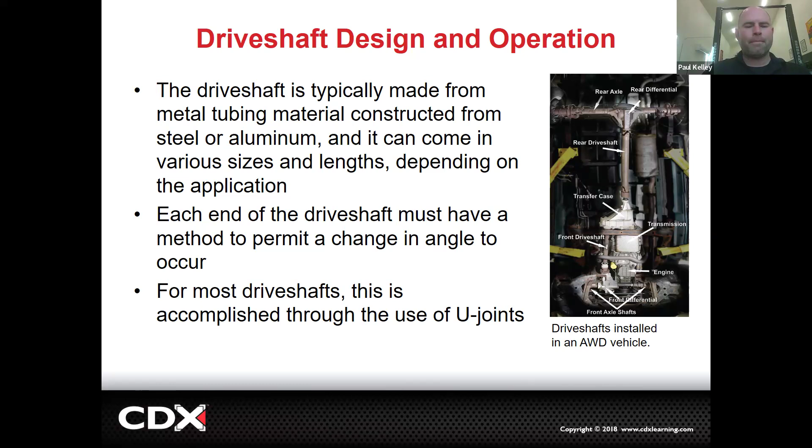Continuing: if you look at the drive shaft, keep in mind, as that rear axle goes up and down, that's going to lessen the distance from the rear axle center line to the back of the transmission. So this drive shaft has to go up and down, which means it has to get shorter and longer, and it has to be able to flex. So we've got a U joint here and a U joint here.

As we get into some of this discussion, the angles are very critical here—mostly it's actually the angle of the pinion and the angle of the transmission. So when you start doing vehicle modifications, that's when you may run into problems. If you modify it, you really need to know what your new angles are, and there are specifications on that, but you generally won't find them in the service manual. Let's say this is a Tacoma—the service manual doesn't write specifications for people to mod the vehicle. They write the specifications for people to repair the stock factory OEM vehicle.

Makes sense? They're not really trying to support the aftermarket, but some of the aftermarket companies will put out some pretty good information. So a lot of what we're about to talk about is more applicable to people doing lifts, lowering, modifications, and building custom drivetrains. With that being said, because we're really trying to prep for the ASE, we're going to cover it to what you need to know for the ASE, but probably more too. I think if you understand more it'll make it even easier to really understand those ASE questions related to drive shaft issues, particularly vibrations. Vibrations can have a lot to do with the drive shaft.

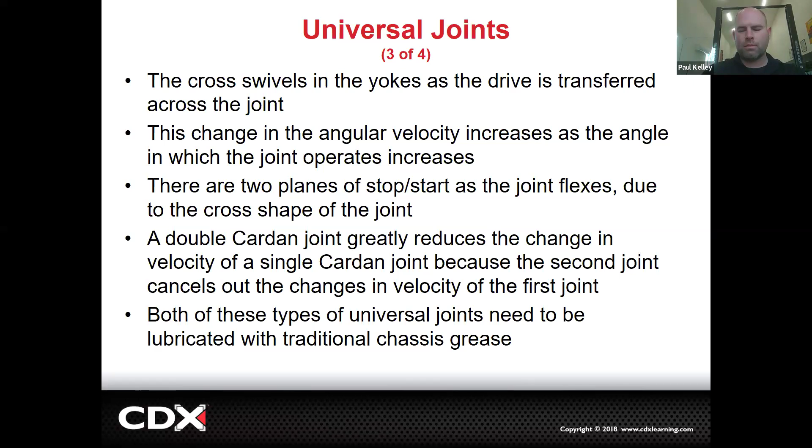So if you did the correct assignment, you would have watched a video, so you should be semi-familiar on this. A lot of this is hard to explain with words. Pictures help, animations are infinitely better. I don't have the ability to make animations, at least not yet. Maybe someday. All right, so here's going to be your drive shaft.

And then once it crosses past 90, it's going to actually start to slow down at 135. And then it's going to reach its slowest speed at 180. So that would be like a half a rotation, right? And then when it reaches 180, it's again going to start to speed up.

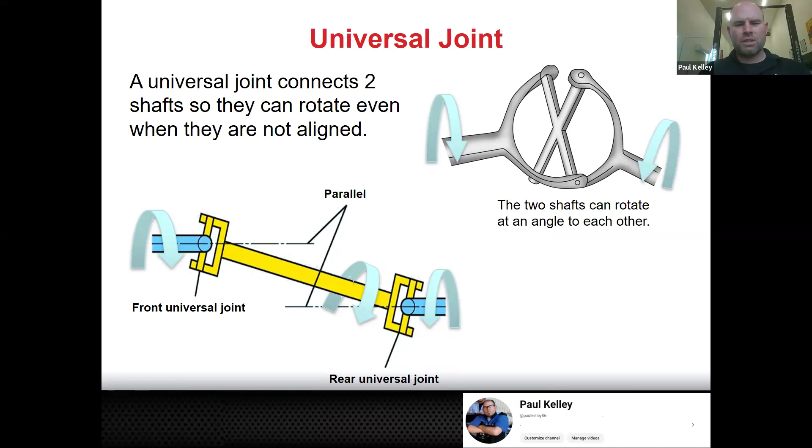It's like pressing a bearing. You don't press an old bearing out and then press the same new bearing back in. If you're changing a slip yoke, you're changing that, at least that U joint. And if you want to change universal joints, you can.

One's a Chris Fix video. Chris Fix does amazing videos. It might not be the most technical, but you can see well, you can hear well. He spends a lot of time editing. He'll show you a way to do the U joint in the driveway.

If you were at the dealership and you wanted to change a slip yoke, you probably wouldn't do the U joint. You'd probably send the drive shaft out, and a drive shaft shop would do the universal joint in a press. They're going to do it a little bit different - put a new yoke on, and then actually balance the drive shaft. So it's kind of a better service, but it's a lot more money.

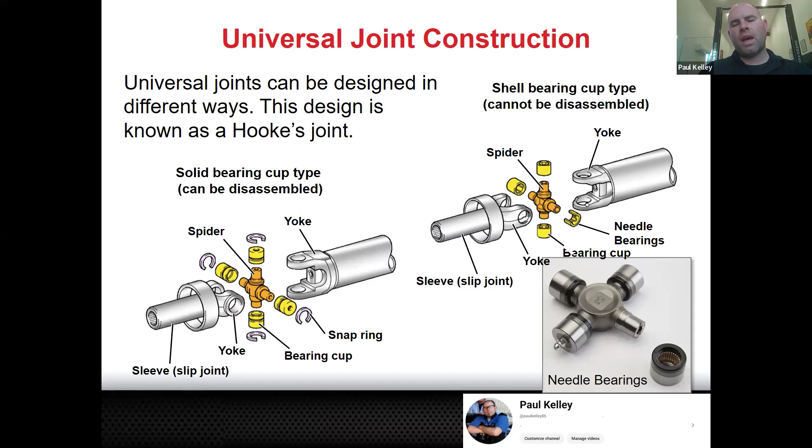So it would be nice if you could pump grease into there. There's a tube, so if you pump grease right here, it goes through a passageway and pumps up this cap, and this cap, and this cap. If you did that every oil change or every other one, you could really make that U joint last. So this is a nicer design, but from the factory, they're not going to give it to you - you can't have that.

Especially if it's a two-piece drive shaft with 3 joints and a carrier bearing, this one could be out of phase, that one could be out of phase, that one could be out of phase. So what do we do to prevent that if we disassemble it? Well, we can match mark it - we'll match mark it here, here, and here.

Okay, why do we want to do that? I can explain it, but I can also give a specific example. I knew some guys who worked for some municipal company - you know, like a city or town water department or power company that provided services. They had a fleet of trucks with their own fleet mechanics. I recall they were in a hiring session talking about who they want to hire and why, and a guy was kind of razzing him, saying, hey, at the fleet shop we're paying 30 something dollars an hour. Then one of the instructors, who was from science, engineering, and math, said, well, what you're paying is equivalent to what my engineering students start out at. He said okay, then asked, but what are your requirements? It doesn't sound like you really have any minimum requirements for the job.

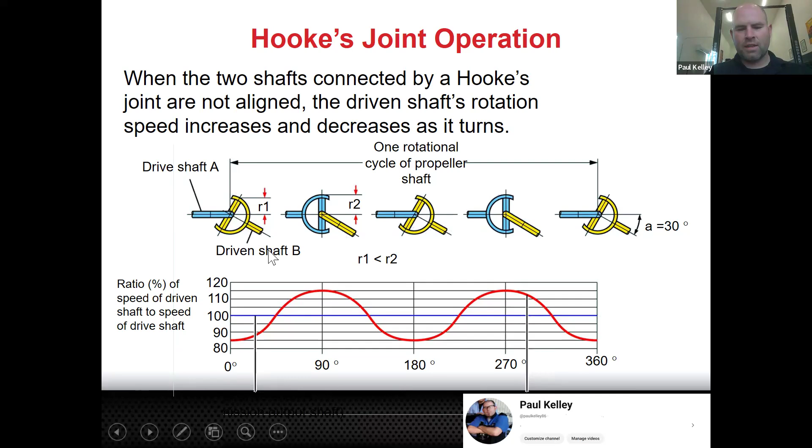They cancel each other out. They should constantly be canceling each other out. It's pretty crazy, huh?

So that's pretty much Hooke's joint theory. If you saw the video, they have a really cool trainer. You can actually hear the speed because they hold a card up against a reluctor wheel and change the angle and goof around with it.

But remember, the key is this input of the drive shaft, which is the output of the transmission, needs to be at the same angle as this, which is the output of the drive shaft but the input to the rear differential. So this angle right here is actually the differential pinion. This shaft right here is the differential pinion, and this shaft right here is the transmission output shaft.

So in a way, really what we're worried about is that transmission sitting on the cross member correctly, and is that rear axle sitting in the leaf springs or whatever correctly? They need to be level. The drive shaft can have an angle, it can't have an extremely steep angle, but it can be 30 degrees as long as the blue lines are parallel.

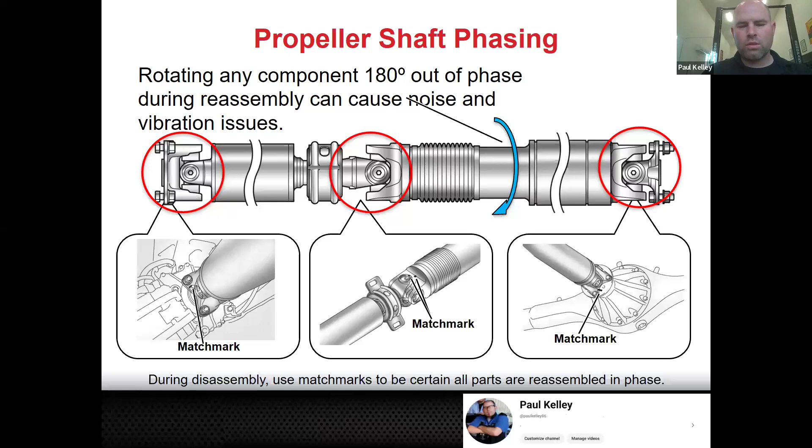The more U-joints you have splitting it, the less accentuated it's going to be. So keeping that in mind, we might not have room for all that on a Jeep because it's a tiny, stubby little drive shaft, but we could do what this right here is: a double cardan joint.

So the input is going to this yoke. The output is going to this yoke, which becomes the input for this yoke, right? So there's basically a two-piece drive shaft with three joints in the length of a single piece. If you see something like this, you're like, what the heck is that? That's just because it probably had a pretty steep drive shaft angle and they wanted to minimize the Hooke's joint effect, but they didn't have the room.

So this is a nice design. We do the same thing, you could measure all the angles. And then a really nice design, probably better, is this. Do you notice that it doesn't have a U-joint here? What does it have? Constant velocity joint. So this is like half of a CV axle.

In this joint right here, it's CV, constant velocity. What is that coming at the end? Just remember, they can put a CV joint in a drive shaft. Subaru is notorious for that, Subaru loves putting CV joints in. They'll have a CV joint with a big corrugated boot, looks just like a CV axle, in their drive shaft, and they'll do it front and rear. So it's kind of cool.

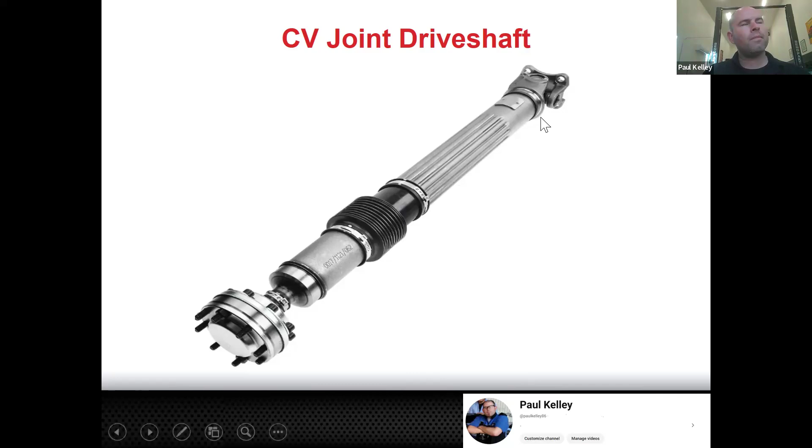All right, now when we're talking about all this, you got the big theory now. You're like, oh, Hooke's joint theory, I totally got that, why do you care? Because if we have an issue and we need to diagnose the drive shaft, you need to understand these concepts.

What can go wrong? We could have a noise, a bearing noise, a squeak, a squeal. Remember that rear U-joint in the snowy, slushy, salty Northeast? If that thing is getting salty slush on it, that's going to dry out the grease and lubrication.

Think of what happens with a ball joint, right? In the original state, the ball joint's well lubricated, like a nice fresh shoulder, well lubricated, nice and quiet, no friction, beautiful thing. But then what happens? The boot gets ripped and the grease comes out. It's kind of like this: if that U-joint seal leaks and the grease comes out, next thing you know the water, slush, rust and salt get in there. It goes dry. Do you guys remember what happens with a dry ball joint?

It's not loose, it's dry. Squeaks, creaks, right? So you could have a U-joint that'll squeak. The first point of failure is notorious: get in the vehicle, put it in drive. As you accelerate, especially because you put more force on the joint when you accelerate, it goes.

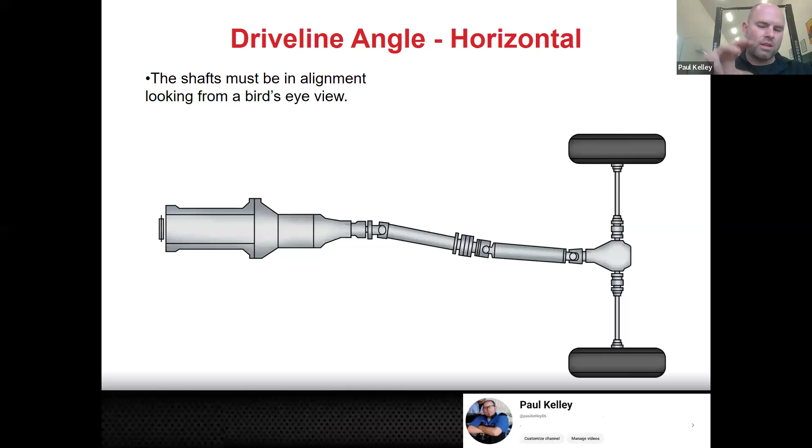So now we've got a few angle relationships to deal with on a two-piece setup. When you add all these up - let's say this one is a positive 15, this one would be a negative 15, a positive 15, and a negative 15 - when you do the math for all of them, they need to be pretty darn close to zero, within a half a degree maximum.

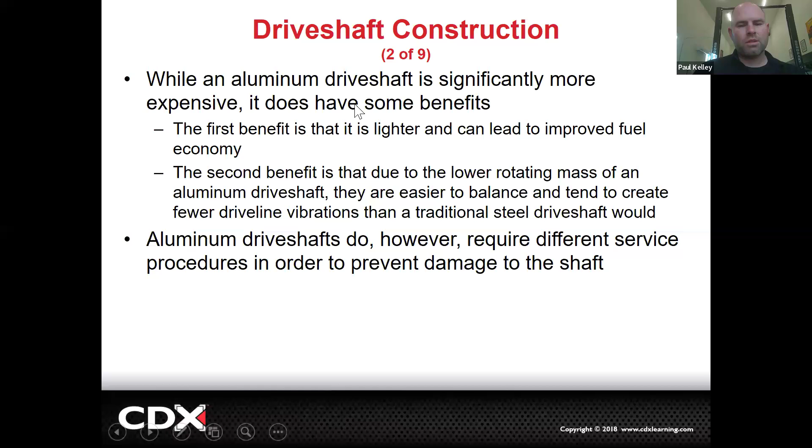But the way we work on them is a little different. Steel was a lot more forgiving, you could bang on these. So when we do U-joints out in the farm, you'd be using a socket and hammering on the drive shaft. Seen it done a million times. On an aluminum one, no, don't do it like that. If it's aluminum, you can easily bend the drive shaft. That's when we get into showing you the proper procedures using a press and stuff. But that's not to say you don't know someone who's done it with a hammer, especially on a steel one. I know it's been done. I've done it, but it doesn't really make it right.

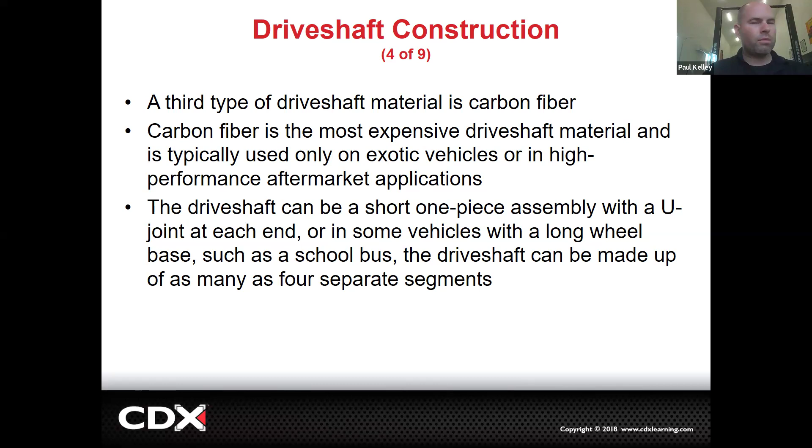What do you think the fix is for that hypothetical situation? Gotta get a longer drive shaft, a custom drive shaft made. They take your drive shaft and add to it in the tube, I don't exactly know how they do it, a drive shaft shop, not someone in the farm with a hammer. A drive shaft shop could actually extend it and then also balance it and do all the details that they do.

Now, if it's four-wheel drive, it's different. We use these companion flanges. If you notice, the companion flange bolts right up to the back of the transfer case, and similar to the two-wheel drive, it bolts right up to the rear axle.

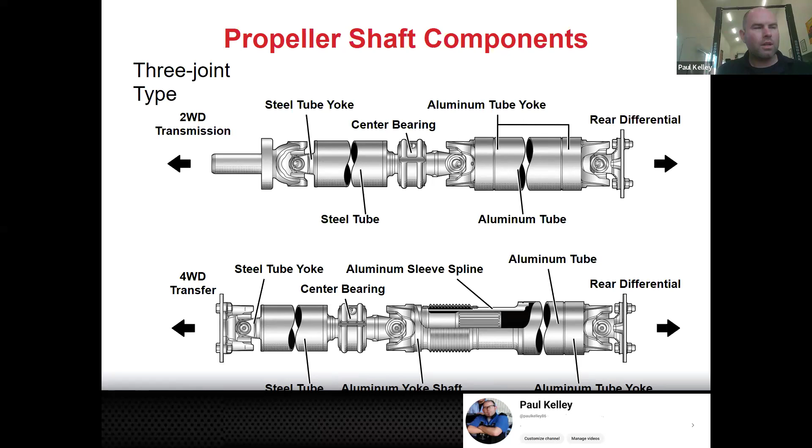U-joints, squeaky noise or a vibration, depending on if it's just dry or if it's full on loose, right? So noises and vibrations are different, but they kind of go a little bit together.

This is definitely when you'd see a grease fitting on a Tacoma. They still do have them on the front drive shafts a lot. All right, and then there's that center support bearing. And then this actually is more just getting you ready to understand.

If you're going to take apart this U-joint, make sure you match mark it. Make sure you match mark it. And then this yoke is welded to the actual slip yoke that's going to go in, right? So be ready to do that work.

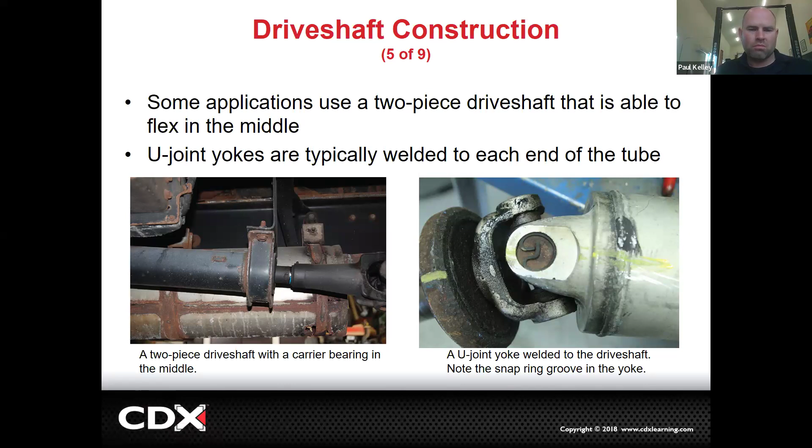Here's your slip yoke right there. You may call it the dangle arm. I totally made that up. If you call it the dangle arm, that's just weird. I'm the only one who called it the dangle arm, and it was only today.

So whatever you say, but this is where the sliding occurs. See how this is all clean metal? That's good. If we got a problem there, which you'll see later, that's when it can tear the seal, right?

So when we talk about the slip yoke, you got to be able to visualize this. This has to seal against that transmission output shaft. If it's pitted, if it's excessively rusty, if that bushing is loose, like we talked about, the bushing has to support this slip yoke, but it also has to be able to plunge. So quite a bit of things going on there.

And then the splines should be lubricated to not have the bowling ball effect. This one is pitted. That transmission output shaft seal is not going to seal against that yoke. So what's the fix here? You guys tell me. How do we get this to be more like this?

You could try to clean it. You could try to polish it. You could try to clean it up a bit with emery cloth. But the thing is, if it's pitted, the pits are low points. So if you go to sand it and polish it up and cookie disc it and all this stuff, it can clean the rust, yes. But if these pits are actual low points, you have no real way to fill those.

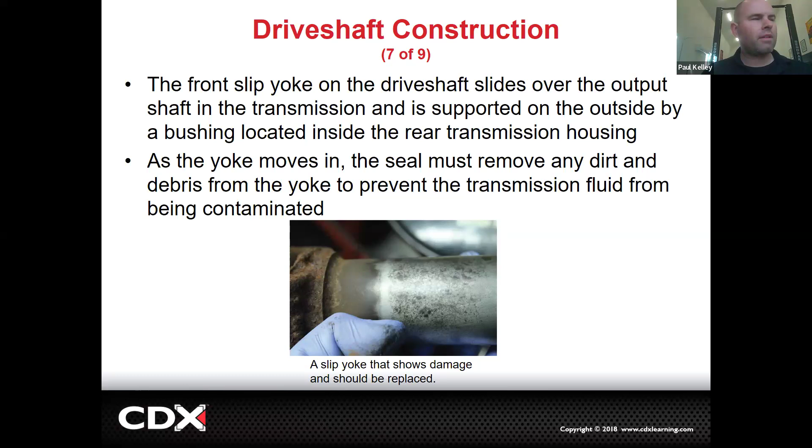All right, there's a good example of that grease fitting where we have the telescoping type drive shaft. That's the slip yoke built in the drive shaft. This is a front drive shaft. Cool. Now this has a different style.

Do you notice this U-joint's exposed? On domestics, they don't have the companion flanges. They basically have the U-joint pressed into this yoke, but on this end, this cap of the U-joint goes directly into the pinion. The pinion has a little yoke on it. And then we put there's a strap and two bolts on those.

So in the domestic world, we use a strap and two bolts right here. They don't give you the full flange, more like what we were showing before. Not a real big deal, but go ahead, shoot that grease fitting with chassis grease on oil changes. That's what you're supposed to do.

Here's an example of that flange. Kind of a cool thing is you can see the outline. So when you go to put it on, don't flip it 180 because it's going to sit weird on the rust. Put it right back where it is so it sits clean. But I'll do it right now. There's going to be a bit of review right here.

Technically, the drive shaft is balanced as an assembly. So if you have a balanced drive shaft and a balanced rear axle, it doesn't really matter if you put this 180, right? In this case, it does because it's rusty and you don't want it sitting on that flaky rust and having it run out, basically like a rotor. But if it's a pretty new vehicle and there's no rust, you can take the drive shaft out and put it back in a different position and realistically won't have a problem.

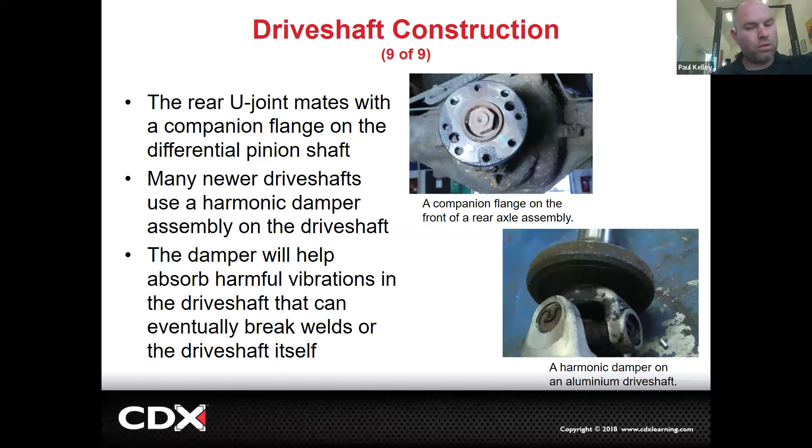But remember, if we're going to disassemble this U-joint, you absolutely would need to match this yoke to this yoke if you're going to disassemble the U-joint. I should be crystal clear right there. Everybody's good? If not, I'm going to move on, but you need to stop me and we'll come back.

Now, when we're doing an inspection, we're looking at this output shaft seal. We're looking for leaks right here. That's part of our inspection. And also, by the way, look at how rusty that yoke is. If that yoke were to plunge very far and this rust were to get sent into that rubber seal, do you think the seal will survive?

So as long as the sealing surface is okay and we don't think it's going to plunge in really far, it could be all right. Rust down here could be normal, but if the rust is closer to the seal and it looks like it's getting into the seal, that's when you need to change that yoke. If it's a slip yoke on a vehicle that's commonly in use, the rust out here just means that area never actually goes in and gets bathed with oil - that's the whole reason it rusted. But if it's a vehicle that sat, you could have rust all over the place. That will ruin your seal - you can put 3-4 seals in there.

Sound familiar? Sound like our A2 review? A technician found a leaking output shaft seal, put a new one in, and then found it leaking again, so they did another one. What should they do, a third one? No - look at the drive shaft slip yoke. Is it rusty where it's touching the rubber of the seal? Well, then that'll do it.

Okay, that should get it. And right here, we're grabbing the drive shaft, going up and down. That's mostly checking this extension housing bushing right there - good concept for you. That bushing should guide the slip yoke and hold it where it's supposed to be pretty well. When we move it up and down, if there's excessive movement, we may actually need a bushing replacement - that slip yoke bushing, that output shaft bushing, may be no good. So that could happen.

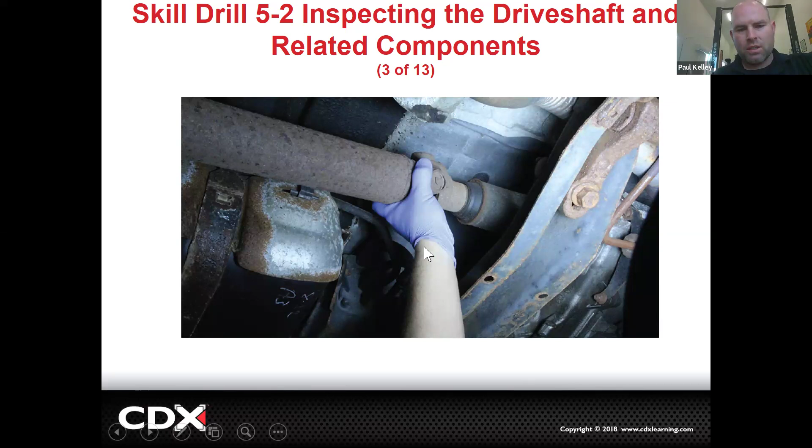That's what we're inspecting. And then here we're looking at a pinion seal leak. This stuff is rusty, but this is the rear axle right here, so this is leaking at the rear pinion. So this is all inspection.

Additionally, if you look right here, we're trying to move right now - what we're trying to do is grab the pinion and grab the drive shaft and try to move the drive shaft. If the universal joints are loose, a lot of times you'll have movement right there, like up and down movement. Like here, we're grabbing it right here, hold it and move it up - that would be kind of like end play movement in the U-joints.

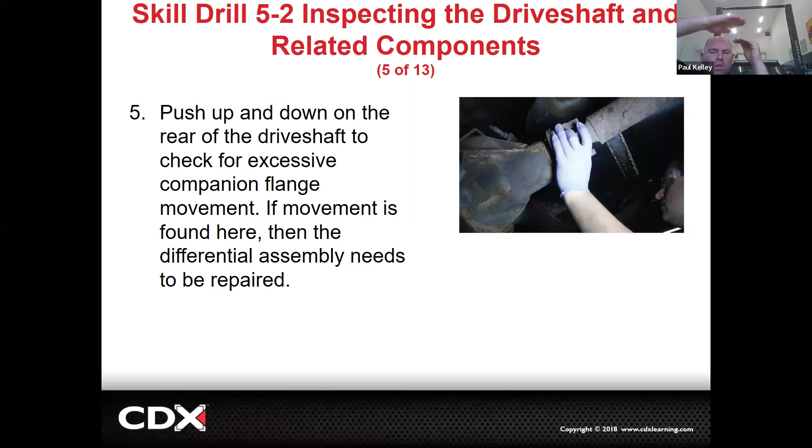That does happen. Cool, we're here, we're looking at the grease seals. Remember I was saying the seals can start to leak grease, and this is where the water and salt water and junk would get in there and really dry that out. That would also be a beach problem. So we got one of the dealers who works on the Huntington Beach lifeguard Tacomas, and they're having issues like this periodically.

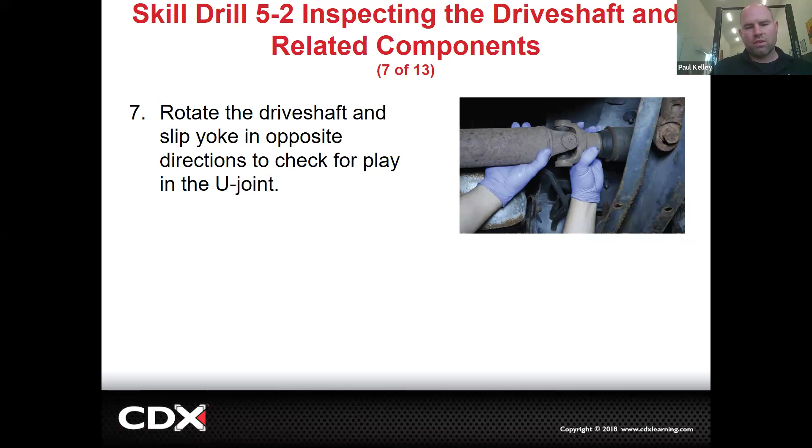Right now, if you were to grab the yoke and the drive shaft and turn them like this, that's checking for U-joint looseness like this. So we got to check like this, but also like this - the U-joints can be loose in different ways. So right here, we're checking for U-joint looseness. If it's loose, it needs to be replaced, and if it's loose, it's going to be inducing a vibration too. Okay, so that's how you would do that one.

Not a real tough thing. And then we're going to inspect the center support bearing. So we would grab the drive shaft, move it up and down right here, move it side to side. While we're doing that, look at the rubber, because sometimes that rubber can be damaged - it's actually pretty common. If the rubber's damaged, the drive shaft sags down and then it's going to get a vibration. Then on acceleration, it might move way up and get a different vibration. If that rubber's bad, you're going to get a driveline vibration, not like a tire balance vibration - it's going to be kind of dependent on your throttle.

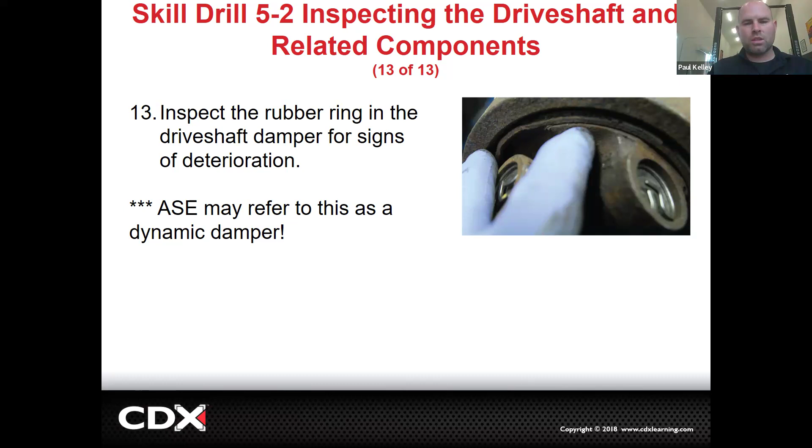All right, and then right here, this drive shaft has a damper, and we're looking at this rubber to see if it's shot, if that damper's moving. Remember, I gave you a clue - there may be something related to like a dynamic damper. This is a dynamic damper - it's kind of like a harmonic balancer, but a lot of times it's on the actual drive shaft. If this damper's missing or this rubber's really damaged, you can even get where the rubber breaks loose and the damper will actually slide on the rubber. That would cause potentially a vibration. So that's all parts of the drive shaft inspection.

Now, another type that kind of goes with the drive shaft, but it's slightly different and not likely to be on the ASE, is called a torque tube. So we have an engine right here, and we don't necessarily have a transmission on this system.

We have the engine going to basically a little transfer box, and then that goes back to the actual transmission. It's a very interesting setup. Actually, I got that backwards.

The engine is in the front and it's got basically a bell housing, and this torque tube bolts up and goes to the transmission, which is back here. So it's like a drive shaft, but all it does is connect the engine to the transmission. It's kind of weird, they call it a torque tube.

That shaft is not exposed. The shaft is inside of a tube, inside of a tunnel. So they call it a torque tube, not really a drive shaft, but it's still kind of like a drive shaft, just to get you familiar.

If you have a front engine vehicle, but the transmission or transaxle in this case is in the back, there may be a shaft connecting the two, such as the Corvette. They did that up through the C5, 6, 7, but the current model is the C8 Corvette, which is mid-engine. They just moved the engine to the back, so it no longer needs a torque tube.

Now let's talk about noises. Like I was saying, a squeak, that's probably a dry U-joint. A clunk, that'd be a loose U-joint. Sometimes loose U-joints can cause other stuff when you're going over bumps. They can do some interesting things.

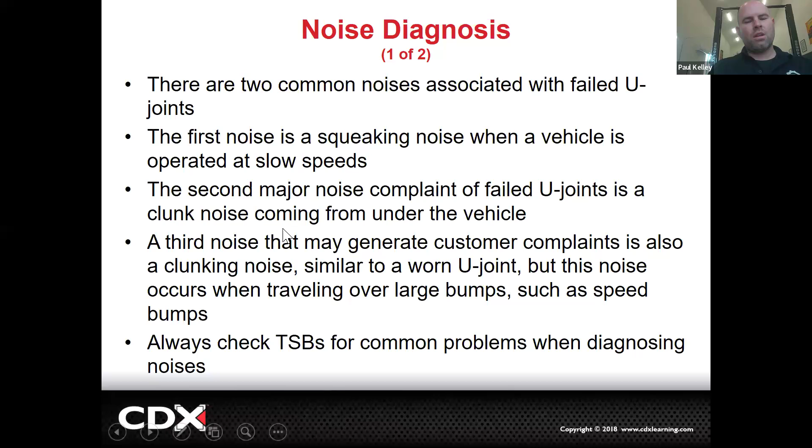Remember, if you have some of these issues, check for TSBs. For example, I told you about that slip stick condition on a GM. This is actually a slightly different one, but it's not greasing it, you're replacing the yoke with a new nickel coated slip yoke. So if you're doing your own diagnosis and think, oh it's this slip yoke, just grease it, but there's a TSB on it with an updated part, you're not being a very good technician if you didn't know that.

So checking TSBs, you can never underestimate how important that is. Extremely, extremely important. Cool. Now diagnosing, ooh, it's going to get a little bit tricky.

I want to mention one tool that we commonly don't necessarily use. It's an NVH tester. We could do diagnosis of vibrations with the Picoscope. You can get a Picoscope with the NVH kit, and it will basically show you different vibrations at different frequencies. You've got to remember on a vehicle, things turn at different speeds, so you've got the crankshaft turning at one speed.

You've got the pistons at a different frequency. You've got the torque converter spinning at engine speed, but the turbine spinning at input shaft speed of the transmission. So those are at different frequencies. You understand what I'm saying? The engine's going 1,000 and the transmission input's only going 800.

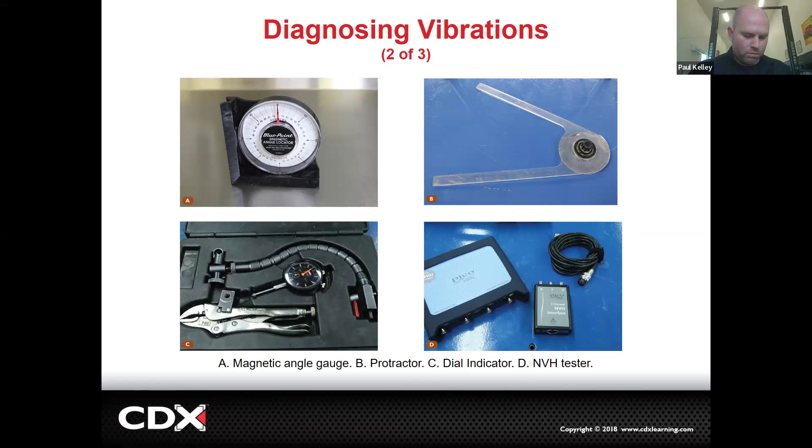A lot of these basics we're covering are a much higher priority. So if I get these more dialed in, I might add a session on NVH, and you guys would be welcome to check that out. But let me see how my priorities are. Because like I just said, I was part of the old school—I saw them diagnose a car as an apprentice, and since then I've needed to do it exactly 0 times.

Now, when we're talking about doing these diagnoses, visual inspection is king—making sure you check for things like the knocked off weight or the brand new U-joints, etc.

We can also measure the run out, I'll show you. Typically 40 thousandths would be the max. A bent or damaged drive shaft would need to be replaced.

So here's how we're going to measure it. Clamp the vice grips there, thread this in, run the snake over to the drive shaft, set the dial indicator on the drive shaft at a nice perpendicular angle, not coming at a weird angle, coming nice and straight, and then spin it, zero it out. And then we're actually going to rotate the drive shaft, and you're going to see how much it moves. Literally like checking run out of a rotor or anything else.

Hopefully there's a spec, but if you'll recall, we talked about a general rule of thumb, no more than 40 thousandths. So it doesn't have to be perfect. It's not like a rotor - a rotor you can't really have more than 2 thousandths, but this should generally not be over 40. You might find that spec in service info. If you find it out there, great.

I love black and white. I don't like gray. I mean, for a car color, I think gray is one of the best. I like black too. I don't like white. I'm sorry, for a house, white; for a car, either black or gray. But in situations, I don't like gray.

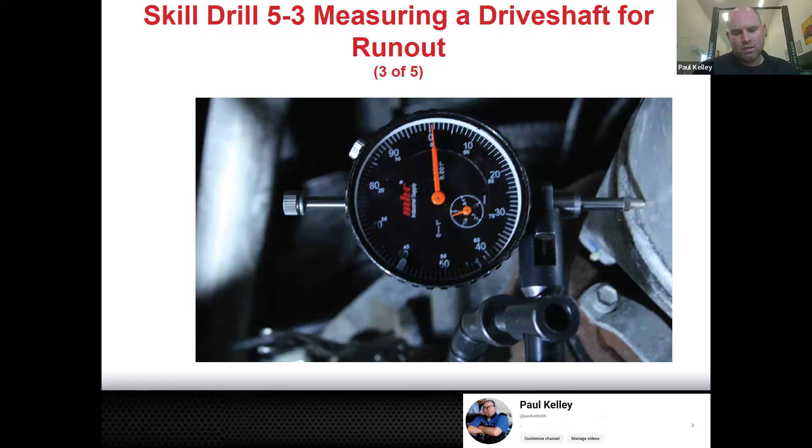So compare it to spec if you can. But again, are you going to do this commonly? Probably not. If you see a damaged drive shaft, you're probably going to see a damaged drive shaft. If it's got a dent in it, and they're not complaining, I don't know that I'd make a real big deal - you might note it. But if they bring it in for a vibration and you can see where they clearly were off-roading and high-sided and it was sitting on the drive shaft and the drive shaft is dented, that needs a drive shaft, right? But if it's something weird and you want to measure the run out, just compare it to the spec. If you can visually see damage though, it's done.

Kind of makes sense. So we'll rotate it, do the measurement. You can do it on both ends, do it in multiple locations - all that's going to help.

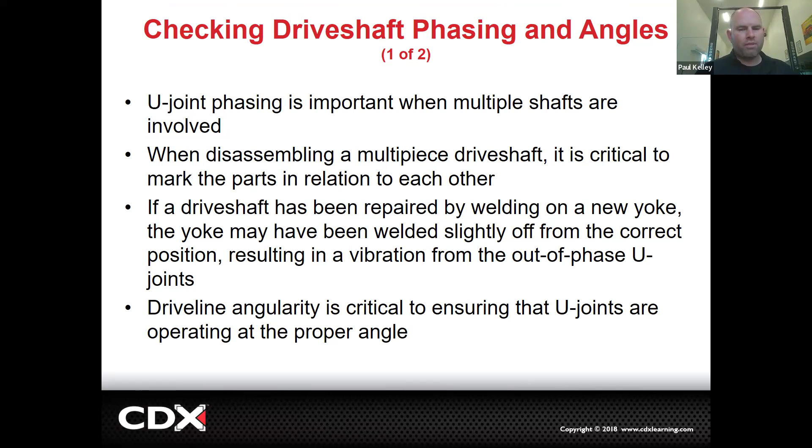Now, when we talked about phasing, disassembling, all that type of stuff, this is going to give you some of the procedures. But first, let's start with what we call driveline angularity - this is the driveline angle measurement. We're going to need two things: one, this is a magnetic square, but it measures angle. We can also use a big protractor, and these together can do the diagnosis.

When are we going to do this? Probably never, to be honest with you. Unless you're doing some major suspension modification, you don't need to measure this. But if a vehicle came in and they did like some crazy SEMA build and they're like, hey, this thing vibrates, first off, it'd be like, well, you did all the fabrication work - setting up the drive shaft should be part of that. But if they're like, we don't know how to do it, we need you to master tech, I'm like, all right, cool, then you need these tools. I don't even own these tools - we have them at the school.

I'd like to do a follow-up video of measuring all these angles, but it would be its own thing. Just understanding them is going to be adequate. For you to get practice and expertise is totally unnecessary because you're just not realistically going to do this unless you become a driveline specialist.

So keep these two tools in mind, and as we go into this, we'll explain it. You want to check angularity - first thing, the vehicle needs to be level at a normal ride height. So good luck fitting under there. You think that you should be able to do this and still walk around at standing adult non-hobbit height.

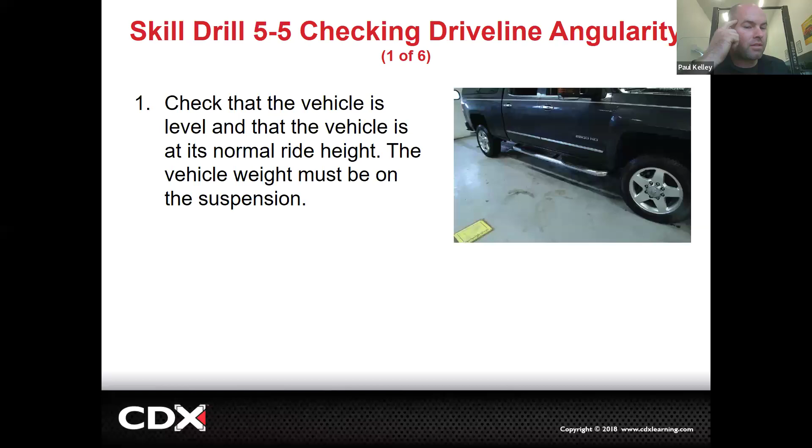There's one lift in the shop you can think of for this. Am I right? You can't have the wheels hanging. It's got to be at normal ride height, it's got to be level. You're going on the alignment rack, right? Do this job on the alignment racks.

Perfect. Now you're going to put an angle gauge on the actual drive shaft. This one's nice because it's smaller. You can literally download that app, and that would work. You need to know that angle.

But the other thing you need to know is the pinion angle. So sometimes if you're lucky, you can put the angle measuring tool on the pinion itself. So the pinion, remember the pinion's that rear diff, that's why we showed that picture. If you know the drive shaft angle and the pinion angle, you can see the difference. So if it's 8.1 degrees and 10 degrees, 10.5, that's 2.4 degrees. That operating angle, that's pretty flat actually, that's a really nice flat drive shaft. So that's got a 2.4 degree angle. That means when you go up to the front, you need to have the equal but opposite angle. Make sense? So that's how we're doing the math, that's how we're doing that measurement.

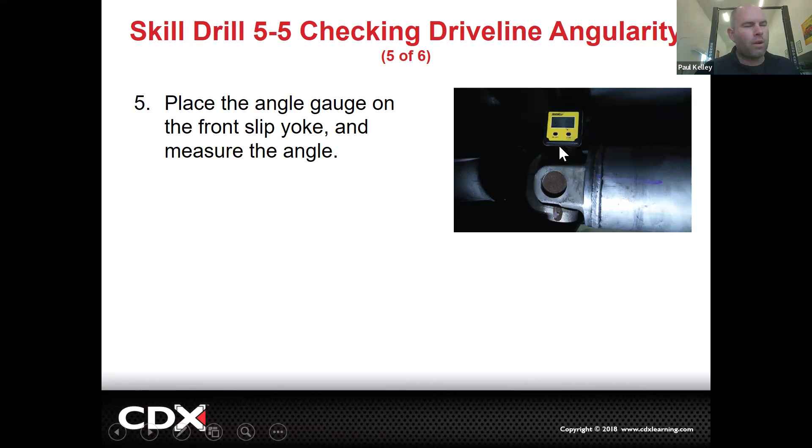Cool, that's a really tough picture to see, I get that. We're going to show it one more way, right? And then if you've got a 10.5 at the yoke of the output shaft and a 1 degree at the drive shaft, you got a 9.5. Those would actually be not equal, by the way. So that could be a problem.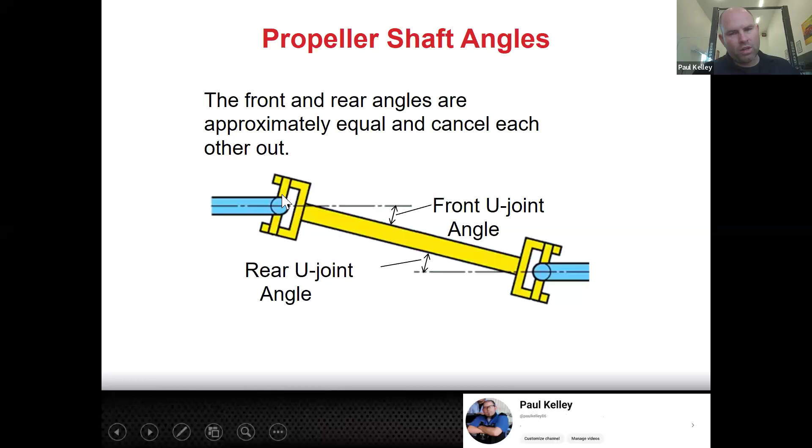Here's what I was trying to say. You've got the output shaft coming out. You see how you'd have a little U-joint cap right there? You'd put your angle measurement tool on that, but then you'd rotate it up to the top at 12 o'clock and you could actually measure it there.

We're going to get a plumb bob and a string and hang it, and of course gravity is going to pull it perfectly perpendicular. And then you can actually measure that angle. But the more practical way, this shaft right here is going to literally control where this cap sits. So if you can just measure right off that U-joint cap, cool.

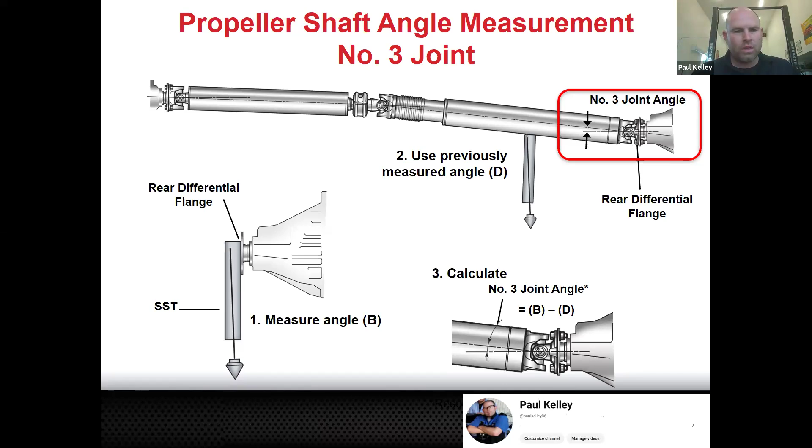So with that being said, that's how you determine the angular operating angles of the U-joints. They may call it drive shaft angularity. And again, as a reminder, if you're going to pull that drive shaft off, a match mark is best practice. But if the drive shaft was balanced independently and the differential is in balance, wherever you put them on, it shouldn't induce a vibration, right?

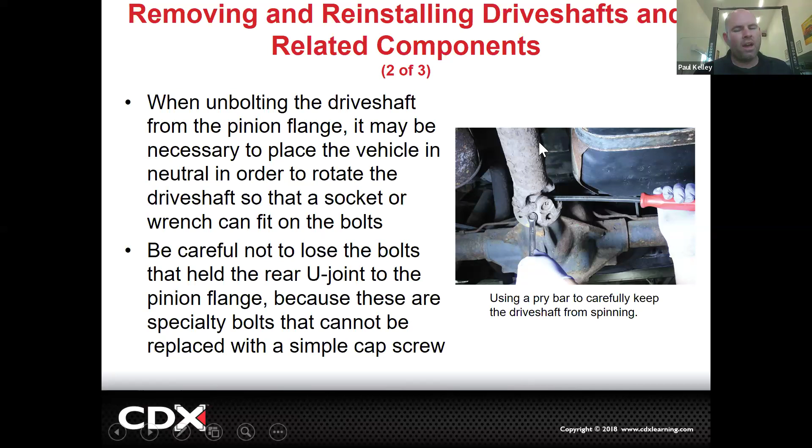Unbolting these companion flanges, prying it out, just be careful with that. If it's going into the open yoke, not the companion flange, it's a good idea to run electrical tape around these caps. Do you know what happens if that cap falls off? Remember those little needle bearings? Those things fall in, they fall out, they fall down the drain. You can mess one of these up.

The good news for you, Toyota people - the companion flange, you don't really have to worry about that. The companion flange is so nice, but the domestics save a little money not doing the companion flange, and they have the U-joint seat right into the pinion yoke, and the caps are held in by nothing once you undo the straps. So tape them.

You can see this is a good image of the strap, right? The strap holds the cap directly. You take these bolts off, you take that strap, and then this cap can fall out. So be careful.

And look at that - what do we got right there? That's another spot you may see a Zerk or a grease fitting. So if we wanted to grease that, you'd have to get the grease gun on there. Sometimes you can, and sometimes you need a special one with a longer needle to pump that grease fitting up. The ones on the end of the cap are a little bit nicer, but then they can also get hit by something. So they do make one that's a very low profile grease fitting, but you need a little needle grease gun to pump those. So you got some options.

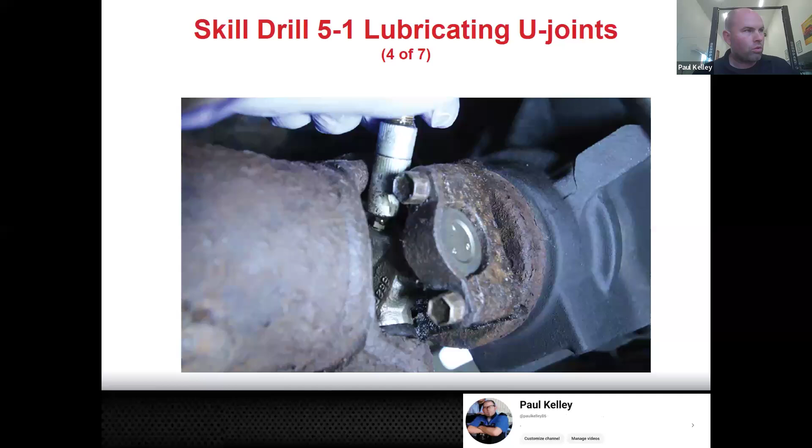See a little bit of grease coming out, that's good. This boot's a little swollen, that's good. That one's perfectly great. You don't blast the thing so grease blobs all over the place - it's just excessive. All right, more parts of service.

We need to balance this drive shaft. When I say we, I don't mean us - I mean someone else. It's not commonly done. Many shops are not going to buy all this specialty equipment. There might be one shop in your area that does drive shaft balancing, and they balance everybody's drive shaft and they get all the business. That makes sense - that way we can keep the cost down. The beauty of the free market, right?

But there are methods of field balancing a drive shaft using hose clamps, but generally we don't really do that. I feel like I'm always in two different worlds. I came up right at the end of old school when we were doing crazy stuff, and then the recession changed a lot of stuff, and business got leaner and meaner, and just the way we did stuff is different. We're no longer super concerned about saving the customer that much money.

We're just like, you know what, this one's getting sent out to the drive shaft shop. Back in the day, we were doing some field balancing, but that was just as I was an apprentice. I never even did it as a line tech.

So if you want to balance a drive shaft, here's what you have to do. You have to have this special machine. You have to put it into this yoke, bolt it down right here, set the angle, turn this thing on, set the test speed. You want to measure it at 1200 RPMs, no problem. You're going to measure, it's going to give you numbers, you're going to look into it. You're going to be like, hey, it needs a weight right here. You're going to make a mark with that weight and hold it there temporarily.

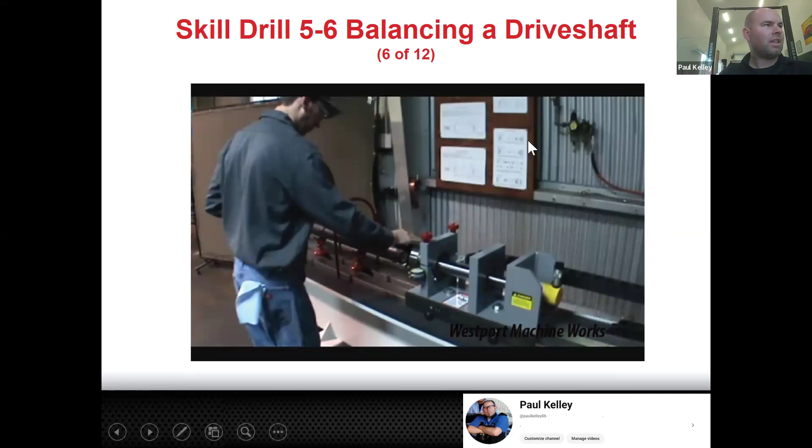Do you think that this is what we're going to be doing? Are we going to do this? This is what a drive shaft shop does. Balancing it is actually not that different than wheel weights, except you have to weld them on and you need the special machine. It's not really rocket science. Just look at this thing. We're not going to buy this and keep it in the back of the dealership to balance 2 drive shafts a year. It don't make no sense.

Cool. But look at that weight right there. That weight was taped to make sure it fixed it, and then welded. What happens if that weld were to break and that drive shaft weight were to fall off? What just happened to the balance? I think you know. It no longer balanced, is it?

So if you see weights, do not remove. Do not. If you see a spot weld that looks like it was broken, a weight probably flew off. In which case, you probably diagnosed the vibration, haven't you? That's why I don't really go all crazy on the NVH kit, because it's usually something you can kind of tell.

Cool. Now, field balancing. This is literally 2 hose clamps. And what we would do, I'm going to describe this, and you don't need to memorize it, but you need to kind of understand it. If on the ASE you see clamps like this, it has been field balanced. We don't weld them on in the shop, we put a hose clamp on there. Where's the heavy part on the hose clamp? Where the screw is. So this becomes the heavy part.

What we would do is if it had a vibration, we thought it was a drive shaft, we'd put a dial indicator here, and you would actually, it's a little sketchy. The other thing, let's make it less about a dial indicator. Let's say, you see how this has a China mark, a China pencil? You'd basically rig up something where it's holding the pencil near the drive shaft, and you'd spin the drive shaft, which I'm going to do with, let me look at something that could be round. Let me use this paint can right here. Okay, you can see this. We'd use this China pencil. I'm actually going to use a real Sharpie.

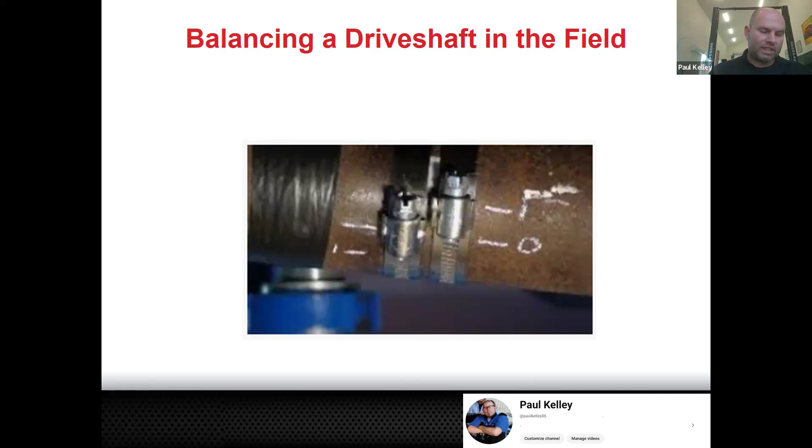They don't make them like that anymore, you know what I'm saying? That's when the men were men and the women were too.

All right, but then let's say we go to reinstall the drive shaft. Why do you think we'd want to lubricate this slip yoke on the outside? Why would that be helpful? We definitely want to lubricate the splines, I think we got that, but what about the outside?

Friction. So when we slide it in, that metal is going to go up against the output shaft seal. And if it's dry metal on a dry seal, you think it's going to probably wear the seal out, right? So if we lube it up a little bit, that's just going to help prolong the life of that lip on the seal.

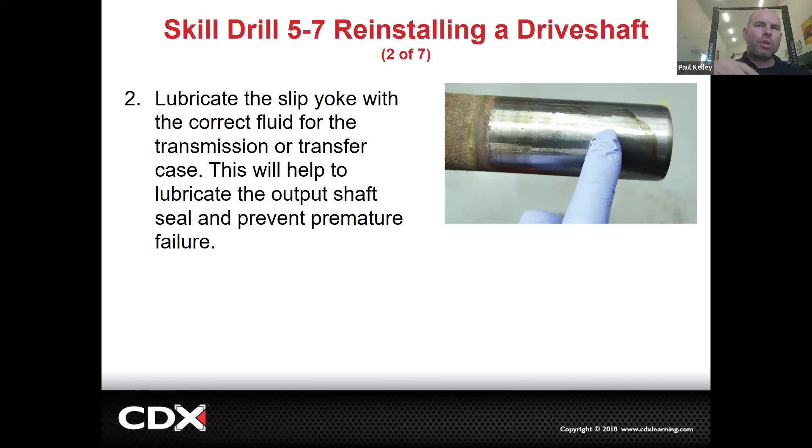Cool, so that's what we're doing here. And then we're going to go ahead and probably have those internal splines lubed, and maybe that internal spline being lubed is going to lubricate the output shaft spline, but then we're going to go ahead and slide it in. And if we made a match mark, which is the preferred practice, make sure we line that up when we go to the rear diff.

And we're going to bolt it up and torque those, because if a drive shaft comes loose... okay, sometimes I'll make myself really humble. When I was an apprentice, I left drive shaft bolts loose.

Later that day, my mentor got a call because he was actually friends with this customer more directly than just through the dealer. He's like, 'Hey, I got a horrible vibration.' And he thought about it. He's like, 'What did we do? Oh yeah, we had the drive shaft out. Okay, I think I know what it is.' And he showed up at the guy's house and tightened those drive shaft bolts.

So the drive shaft didn't fall out, but he told me, I got my butt chewed out. Rightfully so. If you leave a drive shaft bolt loose, they don't just fall out and the drive shaft just hangs out. That drive shaft will come off the rear diff and swing, and it can actually hit the ground. It's even flipped vehicles over. That drive shaft has hit fuel tanks and broken fuel tanks and potentially started a fire and burned an entire family alive inside the vehicle.

Okay, we can go extreme on this. You really need to make sure those drive shaft bolts are tight, that every bolt is tight. But this is actually just as dangerous as a brake caliper or a wheel. If you bolt an airbox in and you leave a bolt loose and the airbox gets a little loose, I'm not saying that's okay, but if a tail light's loose and it kind of rattles, that makes sense. This is something you got to be really careful with.

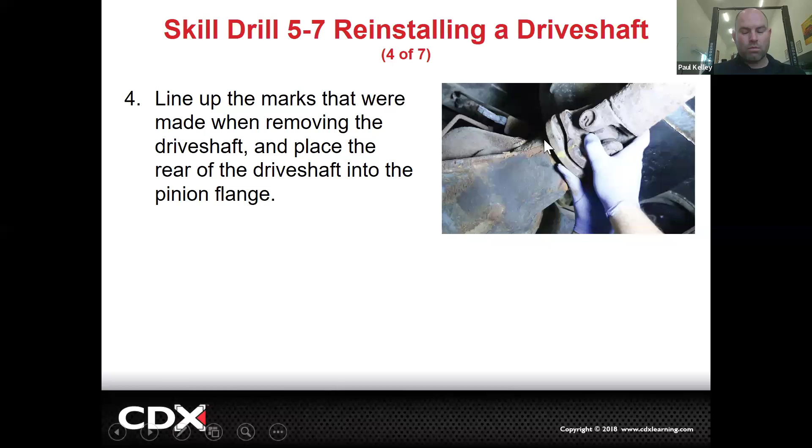If we're turning this bearing right here and we feel a roughness, what do you think that would cause? Give you a clue, it wouldn't generally be a vibration. It would make a noise, exactly, like a growling noise, and the noise will be consistent with vehicle speed. So if it's rubber and it's loose, probably a vibration because of the Hooke's joint angles. And if it's a bearing, like the rollers, probably a noise because of the roughness of the rollers rolling across the race, right? Both of them would require a center support bearing.

So I want to make sure you understand both failures, because somebody would say, 'Oh, a center support bearing causes a vibration.' Say, 'Well, it can.' And then someone else could say, 'Oh no, it doesn't, it causes a noise.' Well, it can. It could be either one, depending on the nature of the failure.

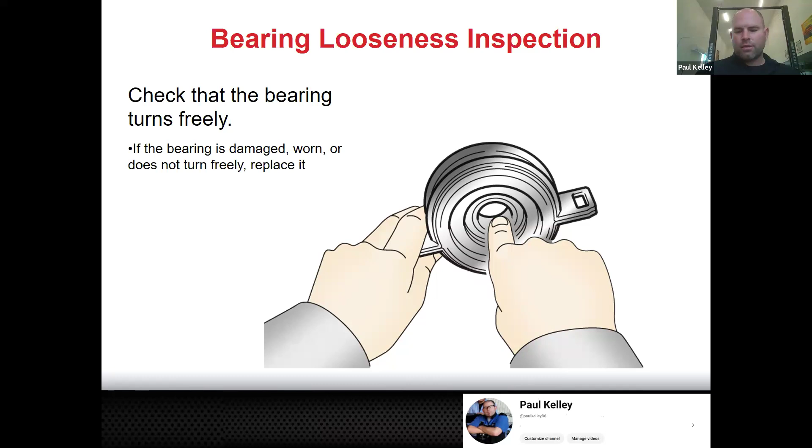Cool, so here we're going to change a center support bearing. So we're going to just cruise through some of the steps. And again, are you going to change a center support bearing? Probably not. We've changed some at the school, there's even been some shops that have changed them. But generally, what would you do if it needs a center support bearing?

You speak for yourself. What would you do? At the dealership, probably going to replace the drive shaft. If you're trying to save the customer some money, what would you do? At the dealership, probably going to send it to a driveline shop, and driveline shops can do this. However, if it's your car and you really want to save some money, what would you do?

You could replace this. This is a doable job. We used to do these all the time in the shop. We don't do it so much now, but we did. This was fairly common back in the day. So we'll go through the steps. Make marks. What'd you say? Replace the center support bearing. Yeah, exactly. That's what I would do.

If you could buy the center support bearing cheap, and if you can do the labor yourself cheap, you can fix this for cheap.

This is relevant for you guys on your own, but also relevant for people you work for, because the dealership is not in business to save the customer money. They're in business to provide a very high quality repair. So we're not thinking like, oh, let me find a way to be the cheapest. The dealership's never going to be the cheapest. But if someone's at an independent shop, they're going to say, well, let me find a way to provide a cheaper alternative and take really good care of the customer, because they need to take good care of their customers or they don't have customers.

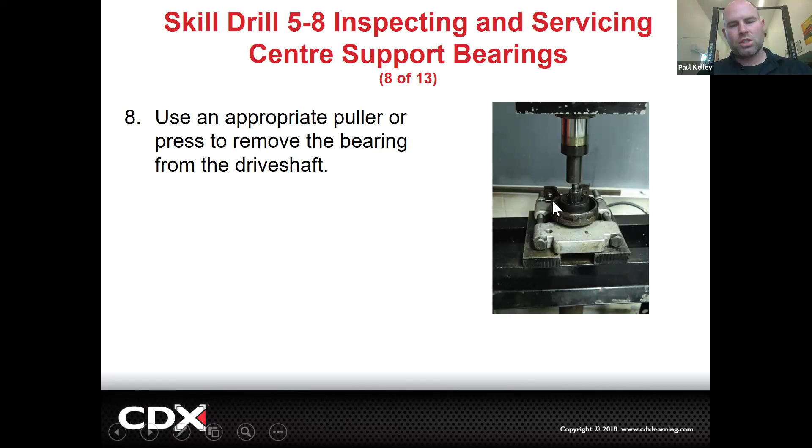All right, and then we're going to inspect the spline, check it all out, and then we'd actually press the new bearing on, get it into place, add the snap ring or circlip, whatever it was - a lot of times it'll come with like a new bracket - and line this yoke up.

Do you notice we're lining the yoke up to the old line we made? If you didn't make the old line, you really messed up. I'm not exactly sure what the heck you're going to do. You might be able to figure it out. Or you might just be wrong.

If you were to have that not lined up, what would the symptom be? You guys remember? They're no longer in phase. What did that cause? Vibration. So you may be like, oh yeah, we'll bring your car in and we'll fix your noise that's growling with vehicle speed. Then you give it back to them and now it has a vibration - because you didn't match mark it and now it's out of phase.

Makes sense? So that's why it's valuable for you to understand the theories of these processes, even if you don't do center support bearings yourself. You go work for this municipal thing and they hire you because from experience, someone who's been through a class and has passed their ASE is not going to be totally oblivious to the fact that you're supposed to mark this stuff.

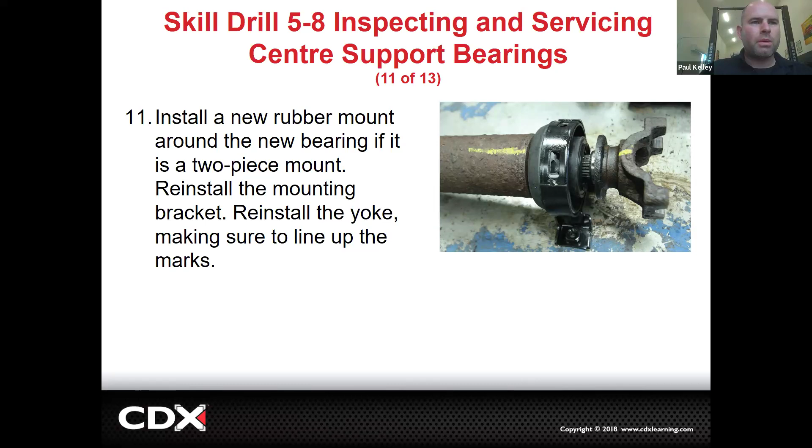That's the logic right there. If you pass your ASE and you got a patch, good - that doesn't mean you can fix the car. It just means you won't be totally clueless to the fact that you're supposed to match mark it. Somebody in the business for real is going to know it is valuable, but it doesn't mean you're not a paper tech. You could pass all these tests and not actually be able to do any of the work. You'd be a paper tech, but it still does have value.

Going to place them back together, line all these up, press the new U-joint in. The new U-joint's held by those clips. We're actually going to talk about how to change a U-joint in just a second. Get it all back installed, and there you go. That's how you do the bearing.

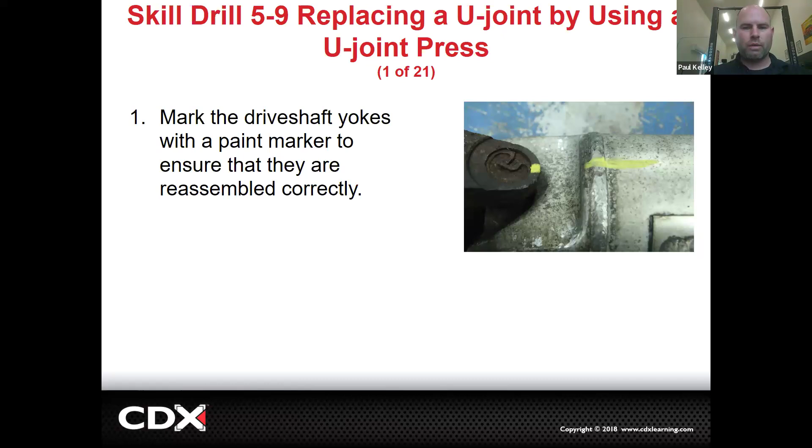All right, but here we go. Remember, we got to match mark it. Again, match marking, match marking, match marking, so when we reassemble it, we know it's right. Take that snap ring off - you guys can see literally just needle nose. You might have to remove grease fittings if it has them, because otherwise you'll break them.

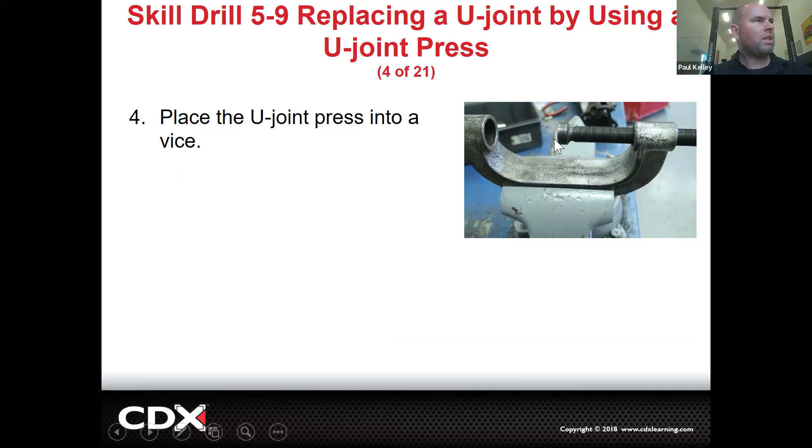Mount this press in the vise. Using this press, you're going to see we're going to line it up where on one side of the press you've got the female right here. See this female? That would accept a U-joint cap. This side's the arbor - that's going to actually press directly on the cap. See, this cap has been driven in. If you drive this cap in, it pushes the cross or the spider, which pushes this other cap. You're going to actually push that cap just about out of there, and it's going to fall inside one end of the press. So if you remember the press, there's this side and there's this side - this has to support the drive shaft really well, but accept the cap to go inside of it. And then as we press that in, eventually the cap will pop off.

See, this cap's actually ready to come out. If you do it just right, you might be able to get both caps out, but sometimes you'll press it in enough where you could maybe slide one cap out and then press it the other way to slide the other cap out. There's a little bit of a dance there. But ultimately, this cap is out now. See the grease? There's needle bearings in there. This is generally why we are not going to really reuse this - it's rusty to try to drive it all back through there, and the needle bearings and the grease, you're not going to reuse a $20 U-joint. Even if you're really careful, it just doesn't make a lot of sense.

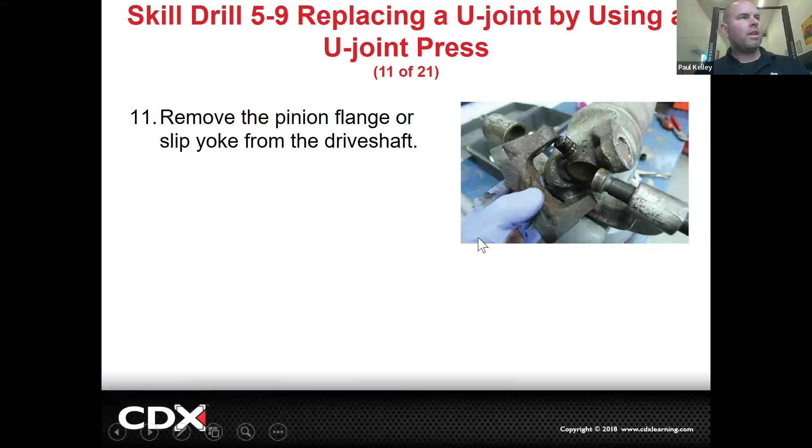And then we'll have to press it the other way. So we got to press it one way, remove the cup, generally press it the other way, remove the other cap. And then once the caps are out, that's when this cross can be free and you can actually get the yoke off one side. Now, do you see if this yoke is off, you could actually accidentally put it 180 out? That'd be a big problem. So you've got half of the U-joint apart now. If you're doing the yoke, the yoke is off, but I still wouldn't put a new yoke on there and reuse those U-joint caps. I'd continue the process, pressing the caps off of the drive shaft side.

So you see they're in the drive shaft side. Right now we pressed them off the drive shaft side. Now you can pull the cross out all the way.

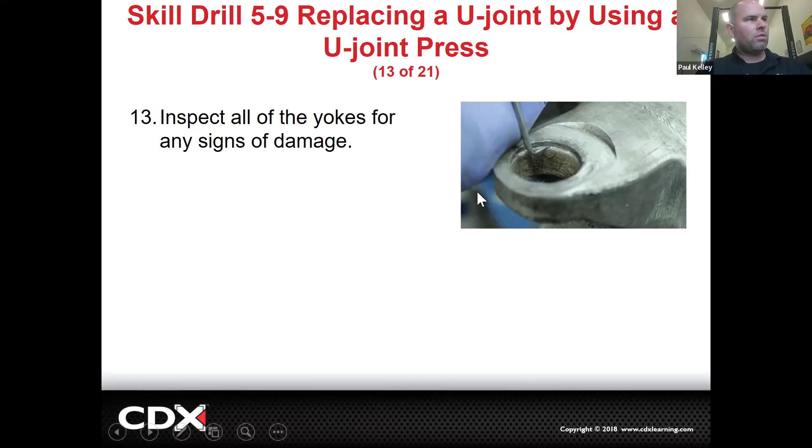And then you can clean this all up, make sure these grooves are good, because you have a snap ring that needs to sit in that groove. And they can vary. Sometimes the groove is in there, and sometimes the groove is on the U-joint and it's on the inside, like those other ones.

So let me back up and remind you, we have these types. This is where we're cleaning the groove right now. But in other ones, we have these types. The groove is actually in the cap.

These ones are one-time use. So I'm going to show you how to take those apart. And then at the end, we're going to put a snap ring in instead.

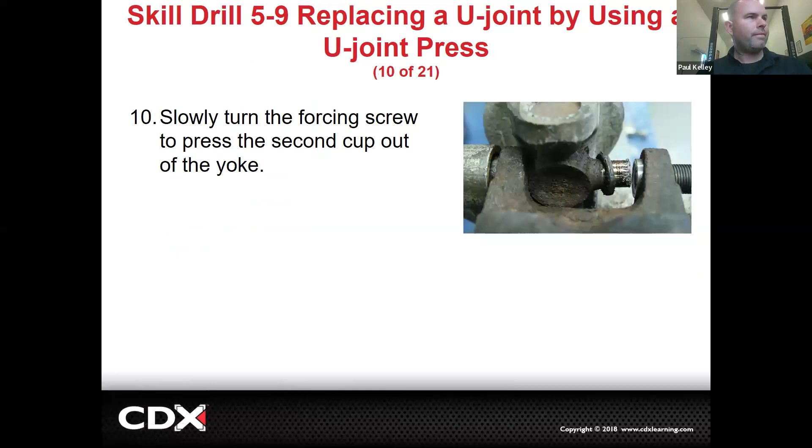Right? So we pressed the cross, we pulled the cross, we cleaned the groove. We installed a new one with no grease fitting, no Zerk. There's going to be a special adapter to make sure we press this thing and we don't damage the cap or damage the joint putting it in.

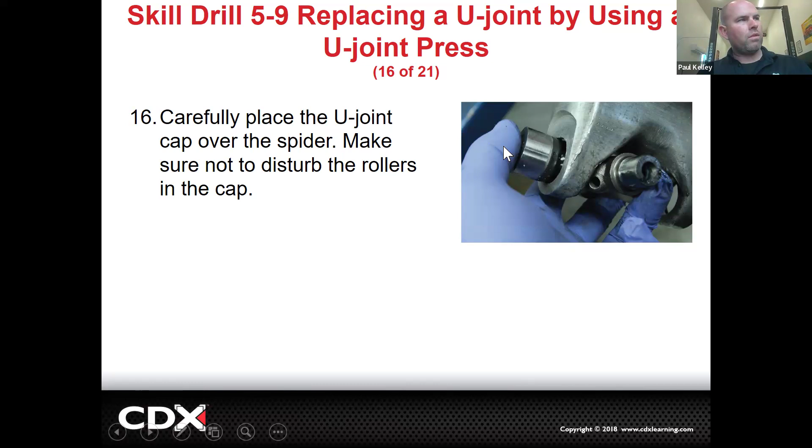Here we can start it. You can see you can push this cap down and get it started, but you actually have to press it all the way in. When you're pressing this one in, the female side would be over here, the male side would be over here. And you got to have both caps in when you start this.

So we're going to slowly start to run it, right? This one is the adapter. The male side is pushing right on that U-joint cap. You could, this is where on the ranch, you'd be using the hammer. Use a socket that's the size of that adapter and you'd be banging the hammer.

The negative of the hammer is this. Well, there's a couple negatives, but the main negative is it shakes those roller bearings, those little needle bearings. It shakes those around. If a needle bearing falls in, this cap will hit the needle bearing. It won't seat all the way.

And you'll just be like, what the heck? It won't go in, I can't. And you just keep banging on it and you'll crush the needle bearing and you'll have ruined your brand new U-joint. Don't ask me how I know. I just want you to know that I know, and I don't want to tell you how I know more than one time.

All right, but if you get it pressed in all the way, going to put the circlip, put the snap ring on one side. Then you flip it to the other side and you're going to install the other cap.

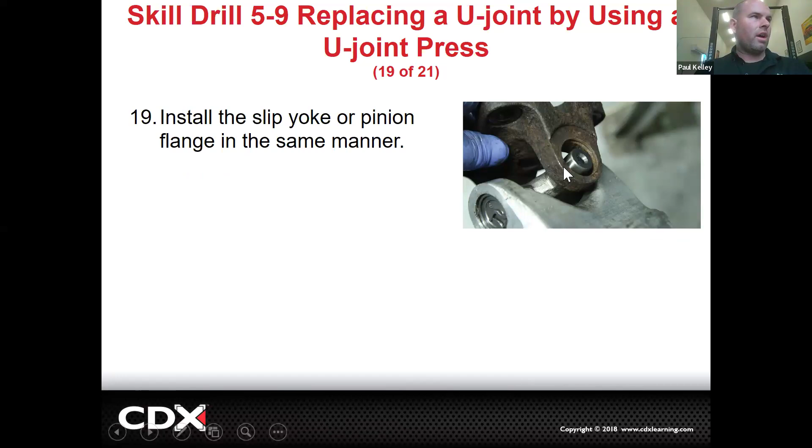And if this U-joint clip is in, if the snap ring is in, you should be able to push up against the snap ring a little bit from the other side and just barely fit the snap ring on this side. Make sense? If you overpress it, you'll actually damage the snap ring. If you underpress it, you won't be able to fit the snap ring on the other side and you have to press a little bit more.

When you're done, move it. If it moves smooth, good job. If it doesn't move smooth, you might look and you might see one of the snap rings is kind of bowed like this, and you'll be like, oh, push that one back down because you're kind of trying to center it. And then it should move freely. Put the grease fitting in.

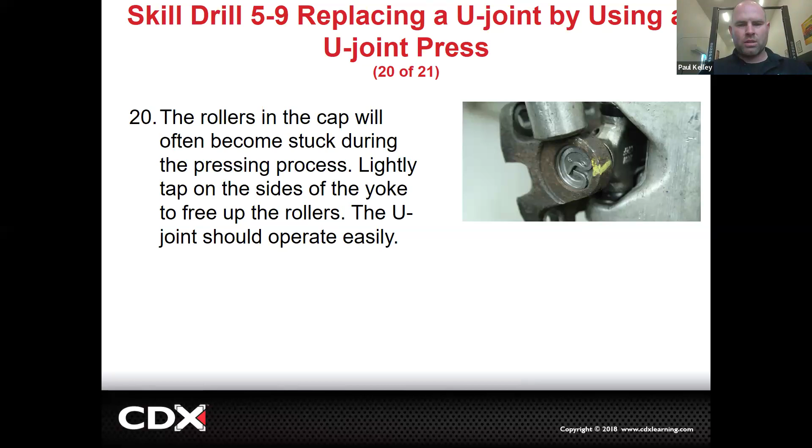Again, if you were going to do this, there's different methods. So this would be one that had the snap rings. Ready? But this is one that doesn't have the snap rings. This one, you see that little dot? That's the plastic. It leaves like a little tail.

So you'd rig it up in the same press and you'd start to press it, but it wouldn't really work yet. And then you'd get the torch out and you'd make this piece a puddle. And it can't be tight if it's a puddle. No, I'm just kidding. You're just going to heat it up a little bit.

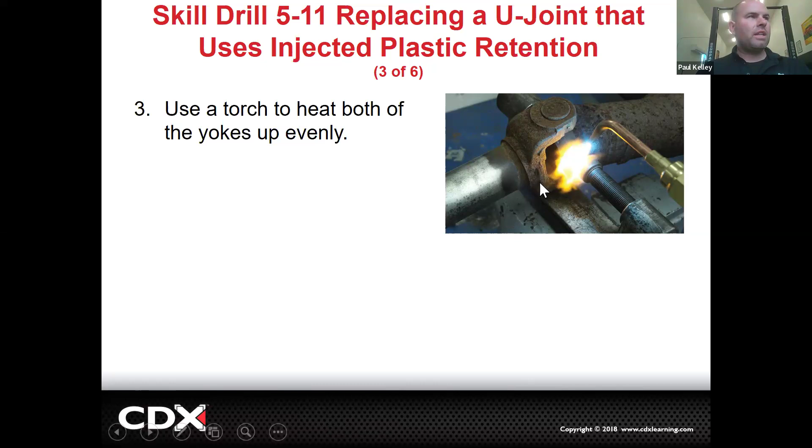And as you're heating it up with the torch, this stuff will start to ooze out of it. And you're going to heat it up and all this junk is going to ooze out. And then all of a sudden it'll be freed up and you'll be able to press it. So you're heating it up to make the plastic liquefy, and it's basically going to back itself out, relieve the pressure. And then all of a sudden you hear a pop and the U-joint will be freed.

So that's the plastic injected molded ones. If you see a torch on there, they're melting the plastic out. Then you press them out.

You can see this one's still smoking. I like that one, I can smell that. I can literally smell that picture. I know exactly what that smells like, and just seeing it takes me to the place. I know how it smells. It's like if you see a picture of leaves in Vermont and you can smell the pumpkin spice, kind of the same.

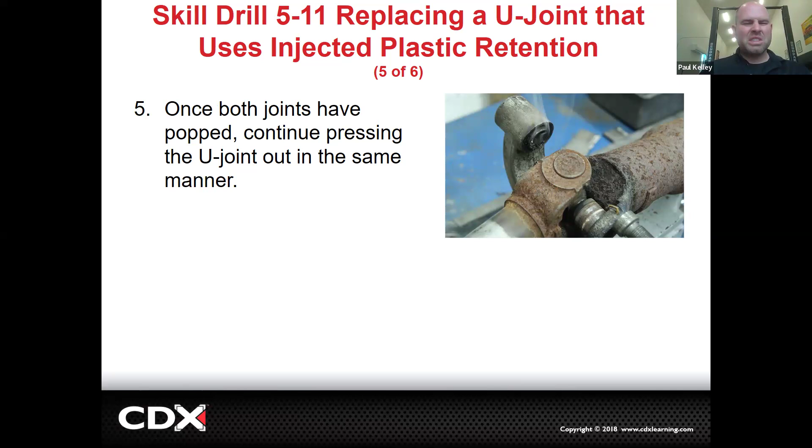Then when we press the new U-joint in, look, you see this? We will put a snap ring on the internal of these and we'll just abandon all that plastic molded. We don't have to re-plastic mold that. We don't do that. We use the snap ring style. So you bust the plastic molded to change it, and then you put a snap ring style in.

Now we're on to something totally different: drive shafts, you should be decent on. Do I expect you to do a lot of the work? Not so much. Do I expect you to understand the concepts? I'm telling you, you need to understand the concepts. They'll be on the ASE, plus you'll be actually diagnosing some U-joint issues. That does happen. You may not do a lot of the services, though.

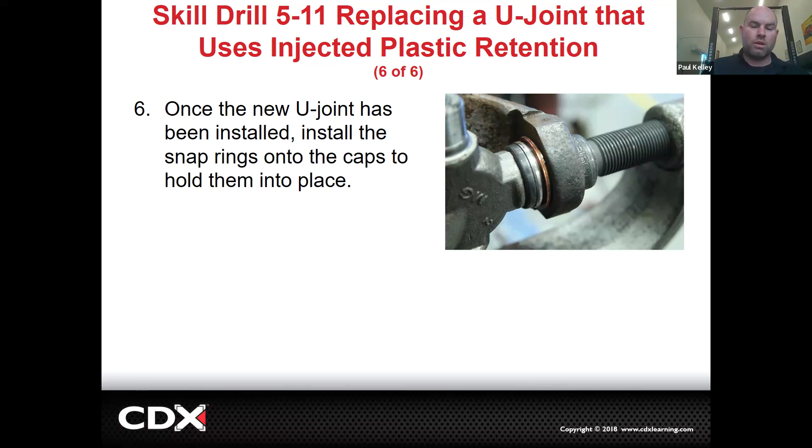I'll give you that. New thing: front wheel drive vehicle. So we're no longer talking about drive shafts. Drive shafts and the Hooke's joint theory have some negatives. If you were to try to put a regular traditional drive shaft with U-joints in the front of the vehicle, it's not going to work well. The reason why is this: you've got the transaxle, and as you're going over bumps, this angle is going to change. If you look at it, the hub angle can't be the same as the transaxle output angle.

So if this angle is constantly changing, and even imagine this, you're steering, right? When you steer, that angle is drastically different than the transmission output angle. You have no way to do equal but opposite canceling out the Hooke's joint theory. You understand? You can't do a U-joint on the front axle.

So if we go back in the day, and this is where that fun video was, that one's a classic right there. But if you were to go back in the day, the cars were rear-wheel drive, so we didn't run axles to the front wheels.

They had a lot of stuff to figure out when they wanted to go front-wheel drive. One of the main things was actually the axle: how are we going to turn the wheel from a transaxle and have it not have a vibration? Can't use U-joints, universal joints aren't going to work. So they came up with this thing called the constant velocity joint. Do you understand why it needs it? These angles are all over the place.

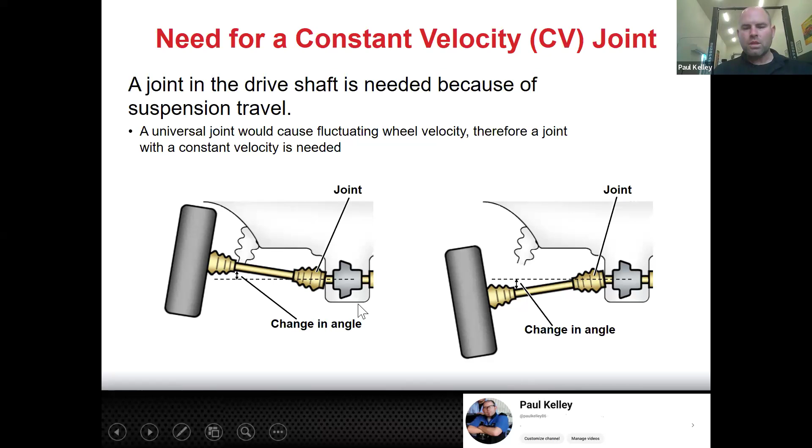Or to one more joint, and then ultimately to the hub, right? And then you'll notice this ring right here, this little snap ring that goes inside the diff - those kind of compress on the way in and they pop into a groove. We got to pop those out. I got a couple pictures of that.

So if you look, here's your stub shaft. We've got - I forget what this is - the inner race. The stub shaft has the outer race, this is the inner race. And we have, in this case, 6 stainless steel balls, which are equally spaced by a cage. And then the CV shaft coming in - so basically this is your outer joint typically. The CV shaft coming in splines into the inner race, and then the balls run on the outer race, which becomes the stub axle that goes into the hub. Okay, so you can visualize it - this is typically an outer joint.

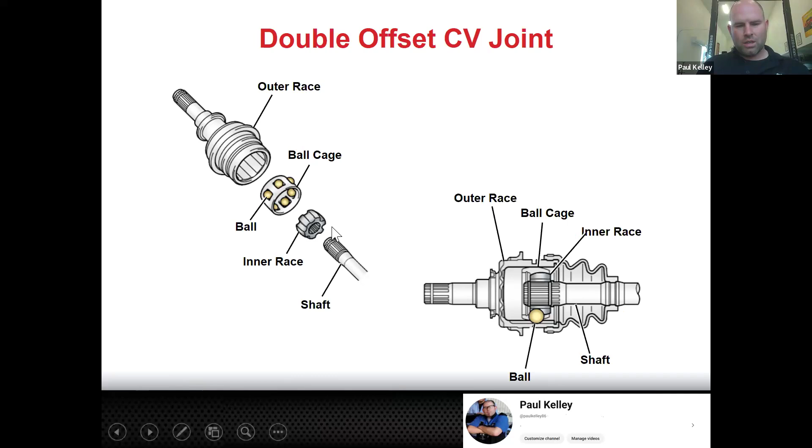So we'll have a CV joint that's basically like almost like two. It's got a shaft and a ball, and then it'll have a couple of different races. They could do some different things. There's that tripod - that would be your inner joint. So we can have some different styles. They even may have a cross groove type, and these just move in their little respective races. So there's a bunch of different types, but they all kind of do the same job.

So if we were to go with that tripod, this one mostly plunges. So I want to pause right there. Remember I said a lot of times a driveline vibration will depend on your accelerator pedal? There's two reasons why. Well, we'll focus on one of them, and then I'll add to it. And then I'll tell you how I learned the hard way, because I always have those.

If that trunnion has to slide, when would it slide? It's mostly on plunging. So if you hit the gas, it's got to expand. If you hit the brakes, it's got to contract. So if there was a problem in that joint, most of the time you'd experience it when you're coming from a stop and you are accelerating because your suspension's lifting up, which means the joint's trying to expand.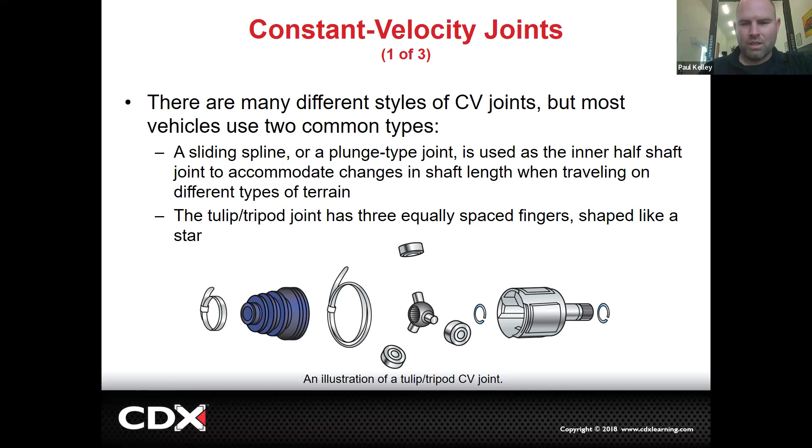That's definitely the problem. But this one, I couldn't feel anything. Right, so it was a really cool diagnosis.

Now let's talk about this outer joint. When do you think you'd hear us go from vibration to noises? Because generally the inner one is a plunging issue that would cause more of a vibration potentially. If this joint was bad, when do you think you would experience something, and what would you experience if it's the outer joint? Anybody got an idea?

Let's say this is from the top down, not from the front looking front to back, but top down. This is your inner part of your axle, this is your outer. What's happening right here in this condition if it's from the top down?

This is the right side axle. That's like a hard left turn, would you agree? And on the hardest of left turns, the ball has to go all the way from the inside to the outside. So if you have some defect on the very outer edge of the inner race, you're not going to experience it going straight.

You're only going to experience it when you do a turn. So if it's an outer joint, the main thing you'll experience is a clackety clackety clackety on turns. If you're going straight, the ball just sits in the center. If you're turning, the ball's got to go over there and get into the defect, and it's clack clack clack clack, and then you straighten it out. So if ASE asks about a vehicle that makes a clicking, slapping, clunking noise while turning and moving, it'd probably be a CV joint.

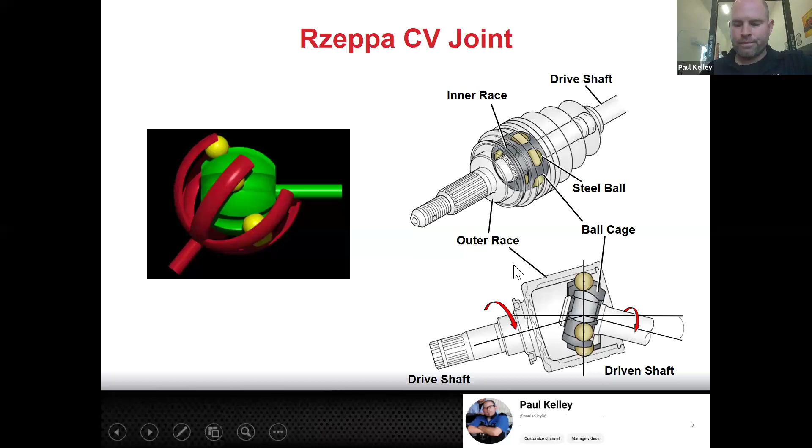And ever since you put an aftermarket CV axle in, when you go from park to reverse, there's like a clunk right there at the hub by the rotor - yeah, they're not a perfectly machined spline. So I really try to stay OEM if I can, generally for everything, but especially for axles.

All right, so that was kind of overviewing like we were talking about - there's that couple types of different joints. You guys should be pretty decent on this, on the failures and stuff. Now there's one thing that we're going to talk about right here.

It's called torque steer. Think about your extension. If you're trying to take a bolt out and you're using this long extension, you might use your impact gun and have it go brrr, and it might not loosen up the bolt. What would you do to get the bolt loose with the same impact gun? Use a shorter extension. The longer the extension is, the more the metal flexes and it kills the torque.

In fact, this same principle applies for torque sticks. So this thick torque stick, this old thick boy here, is a 140. And this one that's thinner - doesn't look thinner - is a 100. I've actually got a really nice one, this thick boy and this little thin one. In fact, let's just go for the thinnest.

See the difference? This one is going to transmit a lot more torque. This one's going to be a lot less. This one is like 55 foot-pounds. So this is going to kill your impact on torque because it's so thin and this metal's going to flex, right? So it's the same type of an idea, except with...

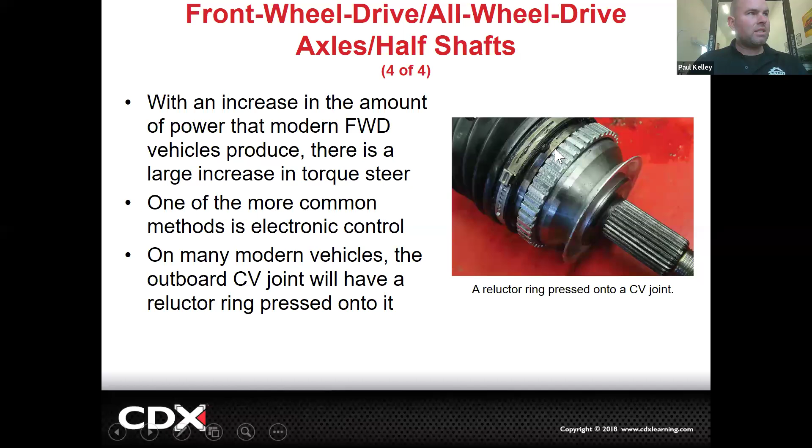And by the way, there are special tools to do those clamps, which I generally keep. Although I haven't used them in a while, I did use them fairly recently. I'm going to show them to you because it's pretty rare. But there are specific clamps. I know where they're at, they're in this drawer. This is to clamp those boots.

So if you want to do boots, you're going to need pliers like this, but you don't squeeze them like this—look what it's got. It's so you can put a torque wrench on one and a breaker bar on the other, and you can actually achieve a certain torque to really clamp those. You don't just get to put a janky basic hose clamp on. Part of the reason they're so specific on those clamps is this gets a ton of centrifugal force. It spins really fast, so the grease pushes really hard, and it really tries to leak out.

If you have a pinhole because you were working on it and nicked it with a pick, or your socket rubbed through while getting hub bolts out, any tiny leak means grease is going to be pushed out so hard at highway speed that it'll be slung on the control arm, slung in the fender liner—grease everywhere. So when we seal these, we need to do a very good job, or it will leak.

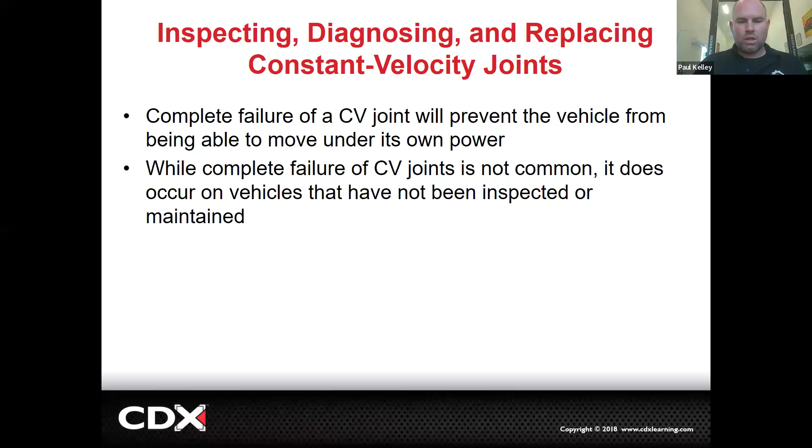If it breaks and comes apart, you can see it. But if it breaks and stays inside the boot, you'd be surprised—it can fool you. I've had a couple cars I had to diagnose where the people thought it needed a transmission, and it just needed a $100 axle, because they were kind of junky aftermarket parts, so I didn't go OEM.

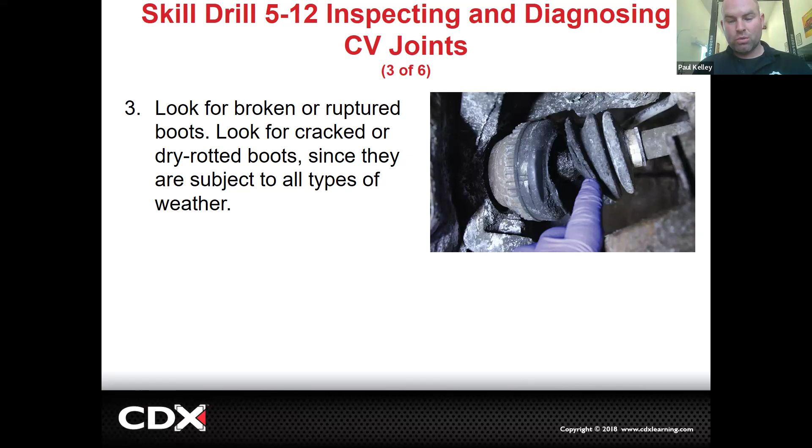Checking it, feeling for looseness. Like I was saying on that Sportage with the vibration, I didn't feel any looseness—the axles felt fine. There was some minor defect inside, just that little wear on the inner joint race.

Okay, and then when we go to do some of this work, it requires a special type of lubricant. So right here, we're about to slide this boot off. This one actually is broken, but when you do a boot, you have to get the grease too—it comes with a very specific type of grease, and that generally comes with the boot kit.

Also, the CV axle has the axle seal in the transaxle, so we'd want to inspect that seal. If the axle seal's leaking, it kind of makes sense to do them all at once. But the other thing is, that axle seal could leak because of damage on the axle shaft—it's a rotating surface that has to be clean. If it's scored or rusted, it's not going to work.

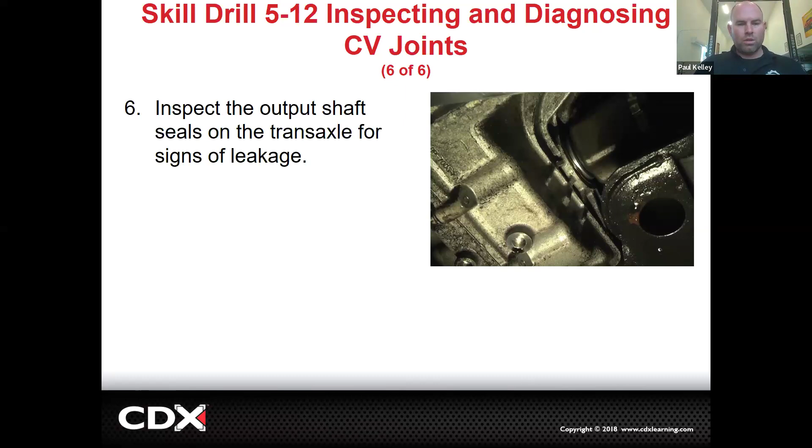Now, to go and do the job, here's a couple tips. When we go to do ball joints, remember, you can bang on it with a hammer and peen the threads over, or do what I showed you with the pry bar, or even better, use a puller. This is a ball joint separator—it's really just a 2-jaw puller. That'd be a good way to do it.

Additionally, when you go to drive the axle out, first off, if it's a staked axle, you need to unstake it well, and definitely spray some lubricant here, because that axle nut coming off can make a lot of heat and it can gall—then you'll ruin that $500-600 axle and the nut. So there's a whole lesson on that.

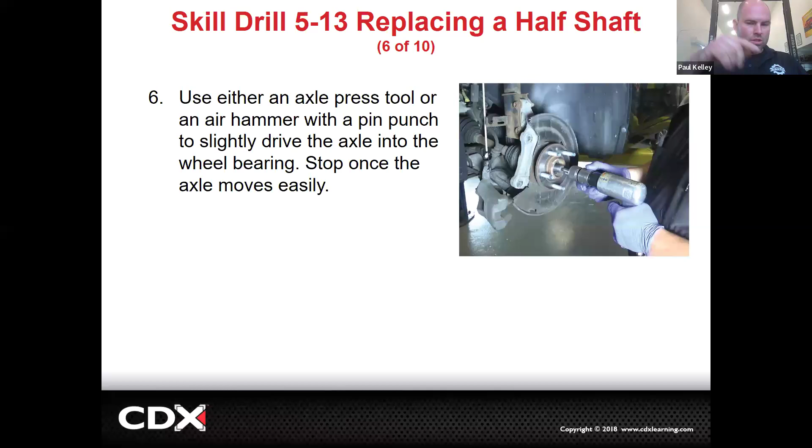When you go to drive it out of the hub, don't bang on it with a hammer, because you'll peen the threads over, and then it's mushroomed, and you can't get the nut to go, and then you got to file it or maybe even replace an axle. I would use an air hammer, go right in the middle because it's got a little point that'll hold the air hammer, and just drive it out.

Then pull it out from the backside. On the inner side, you see this pry bar. A lot of times you can use a pry bar, and it's not about prying hard, it's about popping it loose real quick, and it'll come out. If it doesn't, this is actually a great tool - a slide hammer with almost like a fork on it. You get behind it and bang the slide hammer outward, and that'll pop it out.

Now this is all about that little circlip we saw in that picture. That little circlip is in there. When you slide it in, it contracts. Then when it gets into the groove in the side gear of the differential, it goes pop. So when we're pulling on it, we're really just trying to get that clip to pop out.

Now, when you go to install it, you're gonna press on it, and when it goes to pop back in, you'll know. It's not like you just push it in - you should push on it and have to go like this, and it will go click. That's how you know the circlip is actually in its groove. So you definitely want to do it like that.

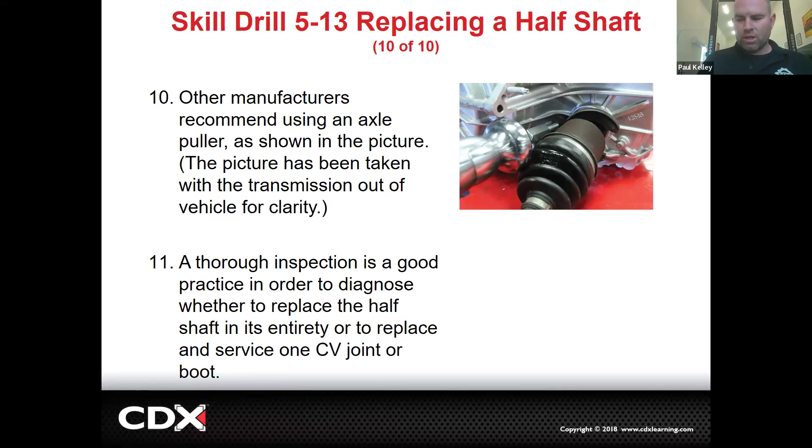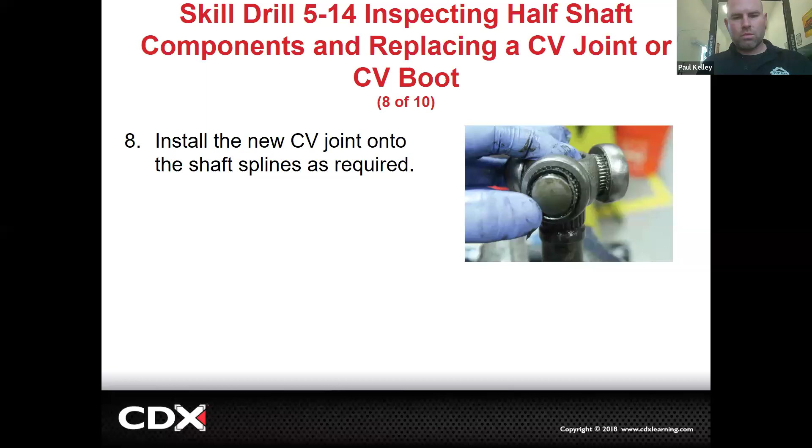Okay, and then here, if we're going to do the boot, you can see we put it in a vise, and the vise has soft jaw protectors. Cut the clamp, take it out, clean the grease out - it's all sorts of nasty. Here's popping the snap ring out, pulling the joint off, inspecting the splines, checking the trunnions if it's the inner joint, checking all that out.

And then if we're going to do the new boot, get the boot on there, pump it full of new grease, get a new clamp using those special pliers. A lot of times there will be a torque spec, right? So we're going to do this rebooting procedure, but this is just to get you warmed up on that.

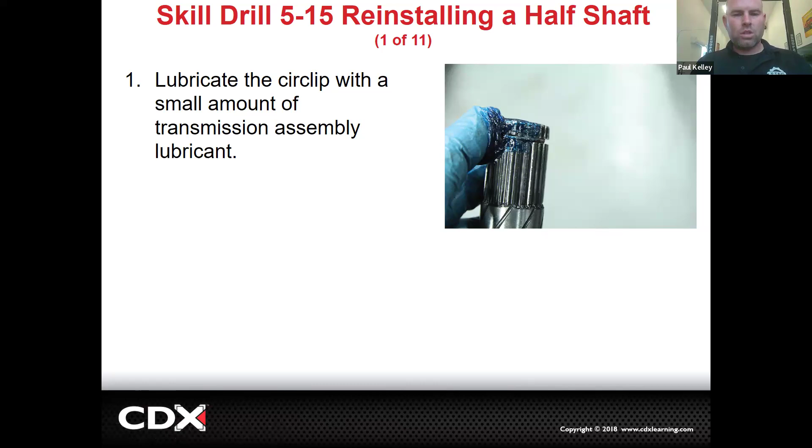And then additionally, the snap ring, the retaining ring that goes into the differential, lube that up. In this case, if it's an automatic transmission, petroleum jelly is good. If it's a manual, you might use a little bit of petroleum-based grease because that's going to mix in with the gear oil or whatever it uses, depends on the transmission. But it's a good idea to lube that up, not go totally dry.

Then why do you think we're lubricating this point? Because this rides in the differential side gear, but this - oh, that's where the axle seal rides. So this is what we need to inspect if we have a leaking axle seal. And lubing it up is going to help prolong the lip of that seal. Makes sense? What lube? Depends on the transmission. This one's automatic, so that automatic assembly lube is perfect.

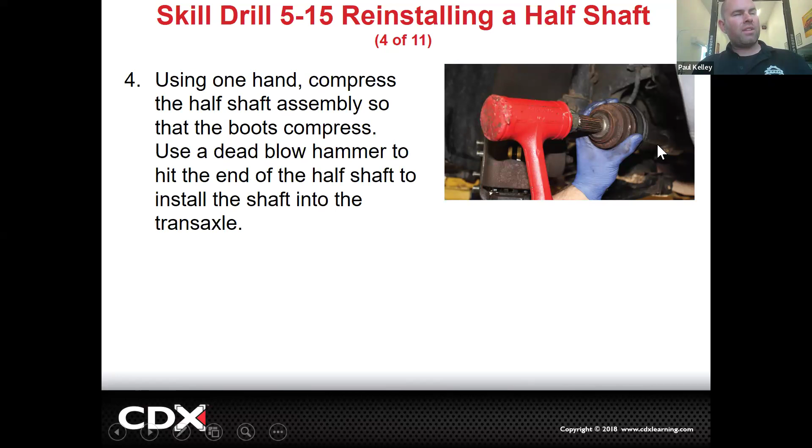And then here we go, slide it in like I was saying, and make sure you compress it. You could even do it like this - this will basically work as sort of like a pogo stick. You hit the end of it, this outer stub shaft hits the inner shaft, and the inner shaft transfers that to the other stub shaft and then pops it in. Cool.

Then when you go to put it in the hub, it's a really good idea to lube these splines. Anti-seize is fine because it's metal on metal - just don't use anti-seize on anything with rubber, but that would be fine. This is especially important in rusty areas, because if you take the axle out and don't lube it, and then somebody has to do it years later and it's seized in the hub, it can be a nightmare, a total disaster. And it'd be really fun if it was you - if you didn't do a real good job the first time, and then you're the one who has to get it out, sucker.

And then there it is, just sliding it in and then torquing the nut to spec. And you guys have made it.